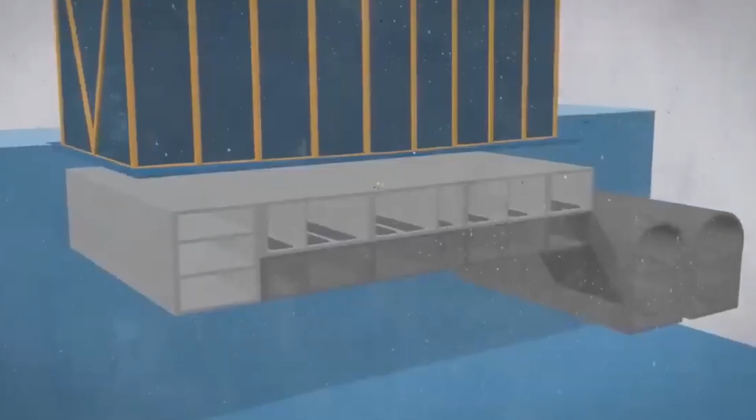The lifted base will create more outdoor space on the ground level on Park and Madison Avenues, which the studio plans to complement with a public plaza and green spaces. To secure approvals for the tower, the New York City Council dictated J.P. Morgan to spend $40 million for improving the district's condition and building a 10,000-square-foot public plaza in front of the tower. This will give Park and Madison Avenues 2.5 times as much ground-level outdoor space. It'll include enlarged walkways equipped with natural vegetation and services for neighborhood residents, workers, and regular guests.

Talking about the overall design, the tower consists of several vertical columns of differing lengths pressed together to form a step structure. The interior will feature 2.5 million square feet of working space along with a food hall, a penthouse conference center, and a fitness center. All this will come at a hefty price tag of $3 billion.

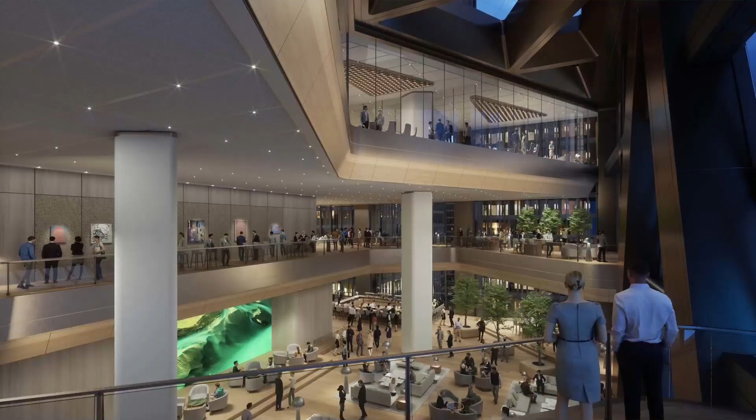The outstanding thing about this building is that it's going to run entirely on hydroelectricity. This makes it the biggest all-electric tower in New York, combined with the fact that it'll have zero net emissions. Foster + Partners claimed that 97% of the building materials were recycled during construction. Over 3 years, more than 93,600 tons of U.S.-made and fabricated steel, 93% of which is recycled.

The old building was demolished between 2019 and 2022, making it the tallest building to be voluntarily demolished. The previous record was held by the Singer Building, one of the earliest skyscrapers in Manhattan that was later demolished in 1968. To build such a large building, J.P. Morgan had to purchase hundreds of thousands of square feet of air rights from the nearby St. Bart's Church and MSD Capital.

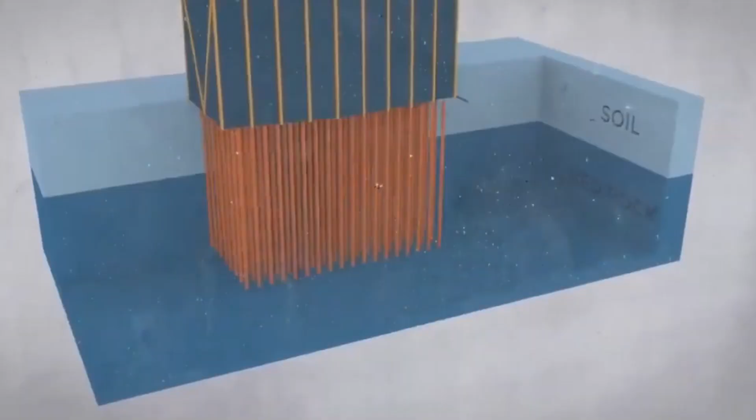Initially, 270 Park Avenue was supposed to be even taller, with a planned height of 1,400 feet. However, such a length requires deeper foundations that could interfere with the Grand Central Terminal directly beneath the tower and the East Side access tunnels. By late September 2023, construction had reached the 4th of 5 tiers. The steel skeleton of the tower is complete, and the last beam was placed in November 2023. The whole project is slated for completion in 2025.

Until the tower is finished, J.P. Morgan and its employees are using 383 Madison Avenue as temporary office space. During the building period alone, the project will create more than 8,000 construction jobs across 40 local unions. The tower's construction injected $2.6 billion into New York City's economy.

However, the design of the new headquarters is not without its share of criticism, particularly about its base columns. Architectural critic Alexandra Lange described the building as a son of Hearst Tower grafted on top of creepy legs, while others drew comparisons between the base columns and that of a ballerina's toes. But that's just their opinion, isn't it? We'd love to hear yours in the comments section.

Number 2: Commodore Tower at 175 Park Avenue. This tower's design is limited to paper only, but if realized, it can be the 3rd tallest building in New York City after the World Trade Center and Affirmation Tower. Towering up to 1,575 feet, 175 Park Avenue will be a super tall neighbor of the Grand Central Terminal.

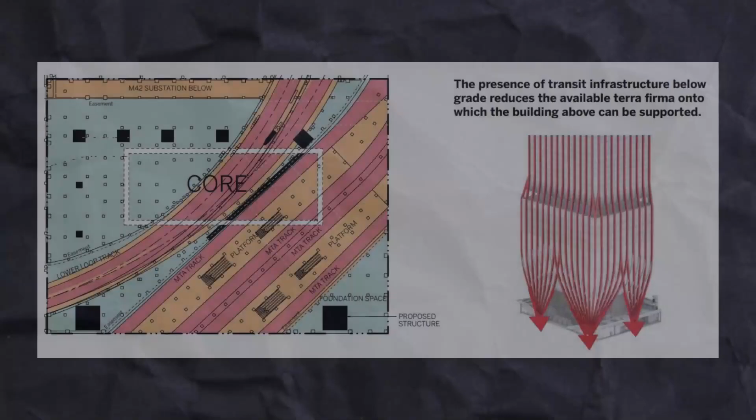It's intended to replace the Grand Hyatt Hotel owned by former President Donald Trump. The 26-story Grand Hyatt is 290 feet tall, but its successor will be grander, offering 2.2 million square feet of space for office, a new 500-room hotel, retail, and 25,000 square feet of publicly accessible terraces. As far as the design's concerned, it'll have a tapered shape set back in 4 tiers. This tapered design is a nod to the old skyscrapers in New York, and it'll allow more light to reach the street.

Glass and steel columns will run parallel on the outer skin of the tower, encasing its stone-clad core. At the base and the very top, these same columns will crisscross each other to form a beautiful lattice pattern.

The elevated public plaza along the eastern side of the property can be accessed by an outdoor staircase along East 42nd Street. The main lobby will feature a soaring atrium guarded by the triangular glass facade, allowing unobstructed views of Lexington Avenue and East 42nd Street. Notice how the huge steel framework over the lobby resembles a giant metallic hand trying to swallow the building.

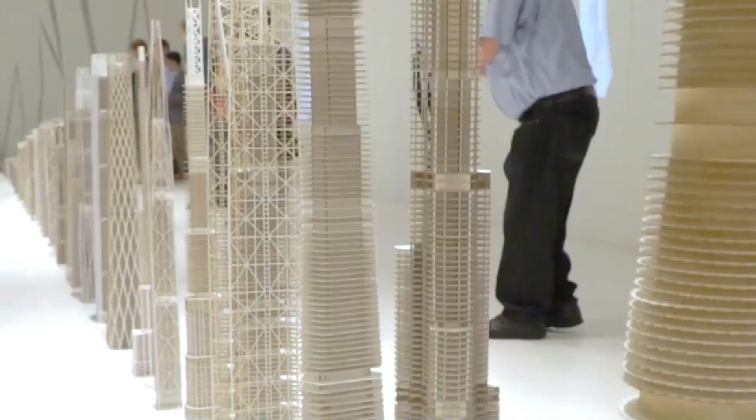Proposed by Skidmore, Owings & Merrill, or SOM, the new tower is set to solve the congestion on the pavement and build a clear path between 175 Park Avenue and the nearby Grand Central Terminal. In return for building this behemoth, the developers will spend hundreds of millions of dollars on new transportation infrastructure, including improvements to Grand Central Terminal, a new subway entrance on 42nd Street, and other public realm improvements.

An additional $5 million would be set aside for local nonprofit organizations and promoting art in the area. 175 Park Avenue will be located adjacent to the iconic Chrysler Building, which will no doubt be overwhelmed by the scale of the new skyscraper.

The Chrysler Building is just over 1,000 feet tall and gracefully reminiscent of New York's past. While the silhouette of both buildings is similar, the Chrysler Building's slim and needle-like proportions give it an air of elegance unknown to the new generation of skyscrapers.

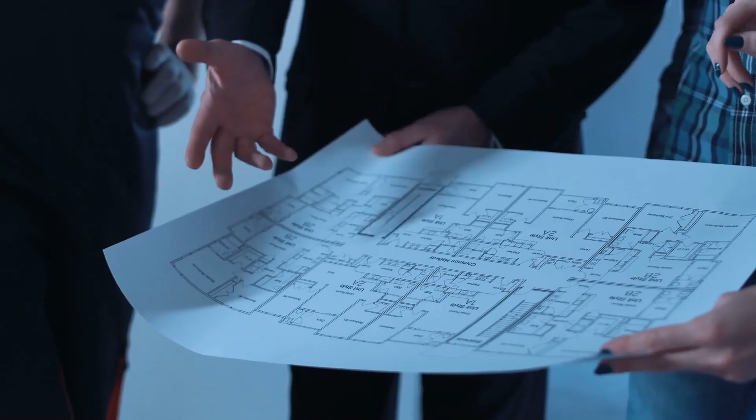To be fair to the new skyscrapers, they're made bulky as the prospective tenants demand larger floor plans to accommodate office, retail, and wellness facilities. Not to mention that New York remains the blue-eyed boy for many startups, businesses, and talented professionals. So the demand for spacious and cutting-edge high-rise developments isn't going away anytime soon.

Moreover, the 2017 Midtown East Zoning Initiative also encouraged bulky structures like the One Vanderbilt, 270 Park Avenue, which we just discussed, and the future 350 Park Avenue to come into existence.

For the tower to truly absorb its surroundings, it'll incorporate elements from its surroundings. For example, the skyscraper's use of stone and visual symmetry echoes the vibe of the Grand Central Terminal Station.

One of the challenges of this mega project is that it sits directly over some of the subway lines of the Grand Central Station. That's why the demolition process has to be carried out carefully, in addition to improving the layout of the underground train station.

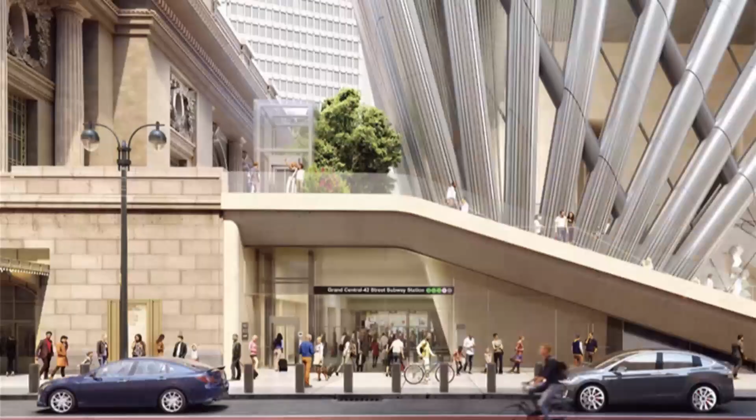Three new public terraces offering seating, food, and drink options will be built around the skyscraper, accessed via staircases and escalators. One of them, called the Chrysler Terrace, will allow visitors to have Instagram-worthy pictures of the vintage Chrysler Building.

The developers RXR Realty and TF Cornerstone acquired the site in 2019. In late 2021, the project gained approval from the New York City Council. However, the initial height of 1,646 feet has been slashed to the current 1,575 feet. Nevertheless, it's still enough to surpass Central Park Tower in New York. It's expected the construction will commence in 2026 and will be completed by either 2029 or 2030.

Number 3, Tower 5th. This is another proposed tower at Midtown Manhattan. The developer, Harry Macklowe, first revealed plans for this 1,556-foot tall tower in 2019. This means that it'll only be a few feet shorter than 175 Park Avenue, crowning it as the 4th tallest building in New York.

Its proposed location is directly north of St. Patrick's Cathedral, wedged between Madison Avenue and 5th Avenue. Gensler is the design architect for the building. Harry Macklowe finalized the $44 million purchase of this particular site in 2019.

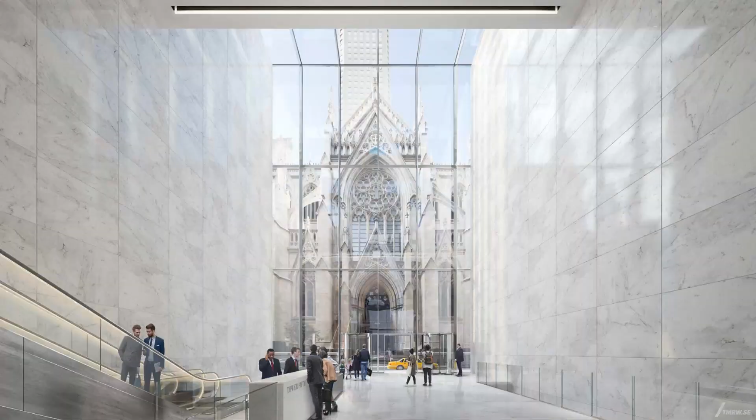The tower will enclose 960,000 square feet of office space, as well as shops, a food hall, and an auditorium. At the top of the tower, the city's highest observatory will offer unprecedented views, as well as unique experiential, cultural, and entertainment experiences. On the ground floor, there will be an 85-foot lobby that will secure the life-size view of St. Patrick's Cathedral.

There's nothing out of the ordinary about the outside appearance of the tower, except the narrow pedestal on which it stands. The pedestal rises nearly 400 feet above the street, higher than the spires in the nearby cathedral. The very top of the skyscraper reminds us of the wooden Jenga tower.

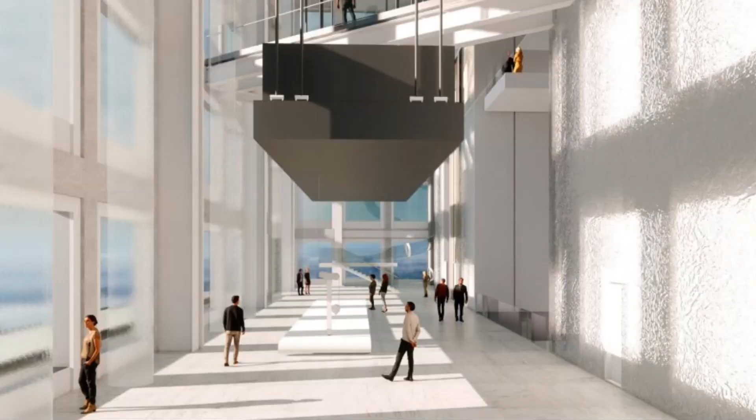Each floor offers 19,800 gross square feet of space without any columns, and a line of windows much like the fenestration of 432 Park Avenue. A restaurant sandwiched between the upper blocks will be encased by floor-to-ceiling glass. Imagine eating your lunch at such a height with a whole skyline of New York in front of you. A nerve-wracking experience for sure.

Other features include a retail and food market in the cellar levels, an atrium that spans the whole height, expansive seating areas, and a 3-story auditorium. The tower itself will be wrapped in an energy-efficient closed-cavity facade system to reduce solar heat gain by over 70%. It'll be the first deployment of this type of system in North America.

The next part isn't for the faint-hearted. There will be a protruding glass plate, almost like the skywalk at Grand Canyon. Two small buildings, one of them being the Venezuelan consulate, will be demolished to free up space for the tower.

But let's keep in mind, securing approval for this mega project would be a lengthy struggle. Its proximity to 5 landmark buildings, including Rockefeller Center and St. Patrick's Cathedral, will bring Macklowe's project into clash with the Landmarks Preservation Commission.

Additionally, if the project's to go forward, Macklowe would have to transfer air rights from St. Patrick's. Since Tower 5th is planned to be 66% larger than current zoning allows, Macklowe will require special permits, zoning approvals, and zoning changes to execute the project. If the project gets the green light, it'll no doubt redefine the skyline of the city.

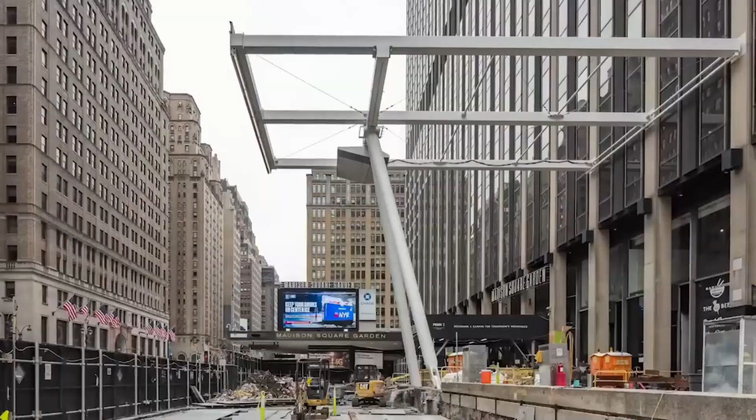Number 4, 15 Penn Plaza. This is a planned office tower to be constructed by Vornado Realty Trust on 7th Avenue between 32nd and 33rd Streets in Midtown Manhattan. It'll be a 67-story skyscraper, reaching up to an incredible height of 1,270 feet.

Designed by Foster + Partners, it'll yield 2.7 million square feet of office space and stand as the centerpiece of the 7.4 million square foot Penn District Master Plan. This redevelopment aims to transform and revitalize the area between 6th and 7th Avenues and West 32nd and West 34th Streets with a total of 8 new buildings.

In a nutshell, the overall appearance of the tower makes it look like a chest of drawers. But if you start to look closer, that's truly where you can admire its grandeur. The latest renderings show 9 cantilevering volumes topped with landscape terraces on the western elevation.

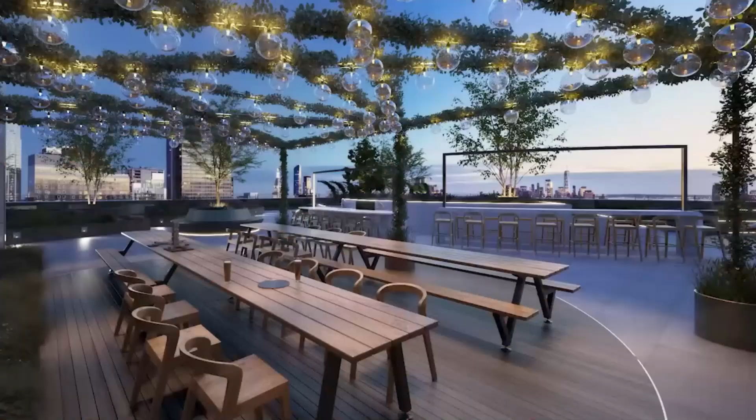The northern face is lined with steel beams and metal paneling, with 3 vertical window columns. The rendering also showcases the tower's relative height to that of the Empire State Building. 15 Penn's top tenants have the advantage of a 360-degree view of Lower Manhattan's skyline and New York Harbor.

The lobby's futuristic design fits a skyscraper of the 21st century. The lobby's high ceiling is enclosed by an equally tall glass frame overlooking the street. It looks even more majestic at night as the light from the inside shines on the outside pavement. The main lobby is as spacious as a shopping mall with 4 escalators to facilitate people's movement.

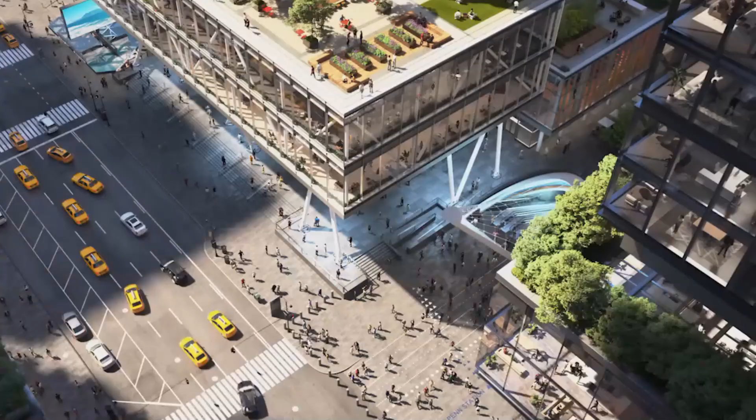The updated design shows a different version of the tower's crown. The old design consists of an extension covered with horizontal metal grills. The new version replaces metal with glass, so you'll see rectangular glass boxes stacked on top of each other. The extensive use of glass gives a very sophisticated energy to Penn 15 and makes it appear lighter and hence less bulky.

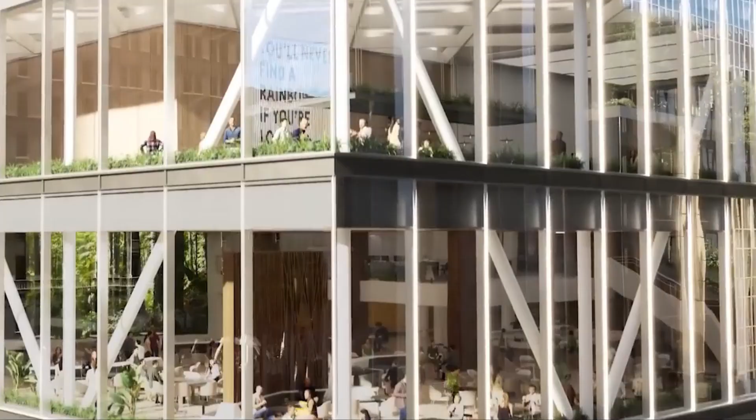Penn 15 will be divided into 5 tiers that encompass several office floors that would be serviced by its own set of express elevators. The highest office level will be 1,165 feet high on the 61st level. A total of 27 landscape terraces will be found at varying heights on the building's spine. It almost looks like a vertical farm from afar. In that way, it stands out from the rest of the monolithic structures dominating the region.

While the project seems great, there is only one bad outcome. To build this 1,270-foot tower, Hotel Pennsylvania had to be razed to the ground. The demolition of this century-old hotel is almost complete.

During its heyday, Hotel Pennsylvania was once one of the largest hotels in the world, with 2,200 furnished rooms. The hotel hosted top-notch celebrities and politicians of its time, like Fidel Castro and Duke Ellington.

Vornado Realty Trust bought the hotel back in 1990, and in 2008 it was given the status of a landmark. After fierce and unsuccessful preservation battles, the 22-story hotel was finally demolished in July 2023.

Construction of the tower is postponed as of now, and Vornado is considering using the site for fashion shows or other temporary use. The tower's construction has also been postponed in the past due to low office market rents. Undoubtedly, this has made some people angry who were against the demolition of the historic hotel. To be fair, it appears to them it was destroyed to build a commercial tower whose plan still hangs in the air. If construction goes ahead, Penn 15 would cost a whopping $1.3 billion, or even possibly more depending on how much it gets delayed.

Number 5: Affirmation Tower. This tower comprises 5 rectangular boxes that grow in size as they climb upward to its 1,663-foot mark. Given its upside-down step design, it gives the illusion that it might tip over on a windy day. Designed by award-winning architect Sir David Adjaye, his designs tend to incorporate bizarre shapes into a neat and sleek design. If approved, Affirmation Tower would be built on Site K, 1 block from the High Line, Hudson Yards, and New York City's No. 7 subway line.

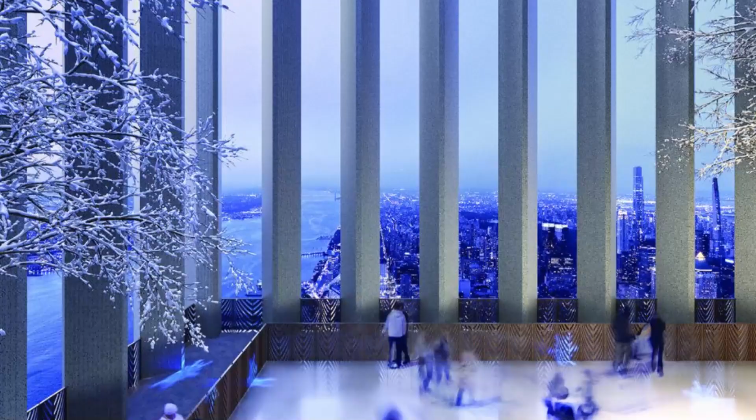Let's examine the exterior more closely. The tower goes 90 stories up with white vertical fins spanning each of the 5 boxes. Behind these fins, there's a floor-to-ceiling glass wall separating the building from the outside environment. Upon closer inspection, you'll see that the top 3 units are equipped with landscape terraces. The rooftops are also enhanced by adding lush vegetation and closed by the extension of the white fins.

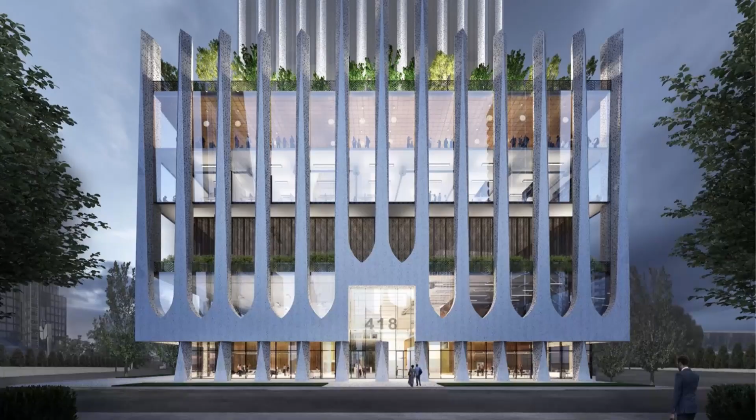The ice skating rink would be available in the winter months. Here, residents and non-residents can skate along with bonus views of the Hudson Yards. The main entrance also shows the same parallel line pattern consistent with the rest of the tower's body. It'll be positioned along 11th Avenue, while a separate entrance for the observatory will be located on the other side of the ground floor. The Affirmation Tower would be a $3.5 billion addition to the Hudson Yards skyline.

Number 6: 525 Fifth Avenue. We had purposefully left the most glamorous skyscraper for last. 525 Fifth Avenue is also a mixed-use building under construction in Midtown Manhattan. It may not be the tallest out of all the structures that we discussed, yet it still has a decent height of 1,000 feet. The 76-story structure will span 415,000 square feet and yield 98 condominium units and commercial space spread across the ground floor and 4 cellar levels.

Its design is unique from the grid window pattern seen in most tall buildings. The tower will feature arched windows repeating along the entire length of the tower. The front view sketches show landscape terraces at varying heights along the facade. The ground floor entrance plays with the same details of arch columns, and the building's address is shown embedded into the sidewalk in interlocking numerals at the foot of the main doors. The arch details of the exterior wall were inspired by the New York Public Library and Grand Central Terminal.

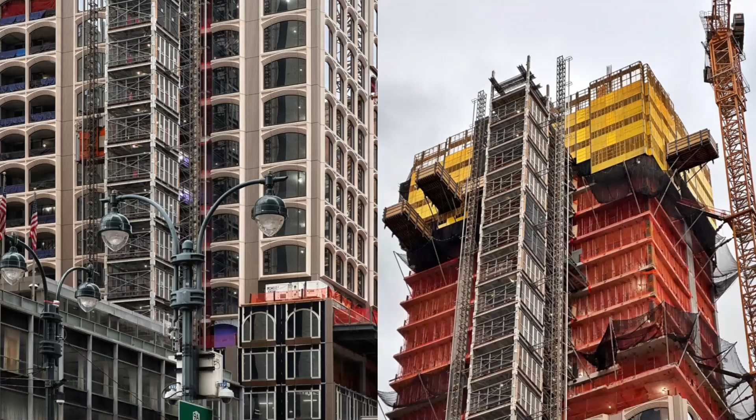The development firm behind this project, Rabina, closed on a $540 million construction package to complete 525 Fifth Avenue. Recent photographs show the skyscraper nearing the 1/3 mark, followed closely behind by the installation of its facade. 525 Fifth Avenue's completion date is posted on the construction board for June 1, 2026.

Last month, Architects Journal revealed that Foster + Partners is planning a massive project in Saudi Arabia, a skyscraper stretching 2 kilometers into the sky. If they pull it off, this giant would not only tower over the 828-meter Burj Khalifa, but also double the height of Saudi Arabia's previous record attempt, the Jeddah Tower. This monumental building is set to rise in the city of Riyadh.

This announcement raises a big question. Is it really possible to build a skyscraper so tall? And if so, how would engineers and architects go about it?

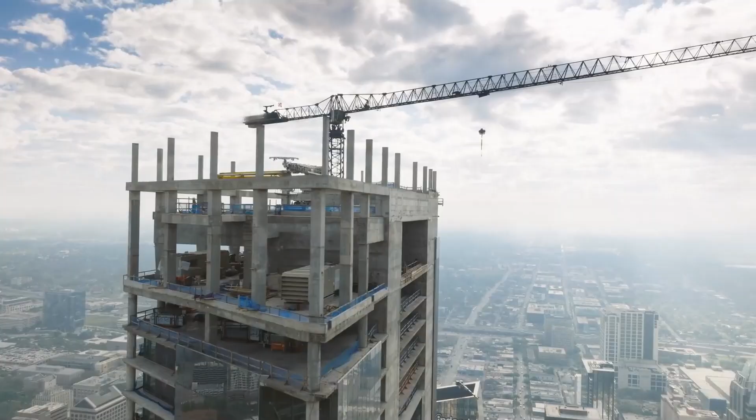Let's take a creative approach to understanding the sheer magnitude of a 2-kilometer tall skyscraper. Picture Manhattan with its dense layout and towering buildings. Right in the center of it lies Central Park, a lush green oasis stretching about 4 kilometers long. Now imagine slicing this iconic park in half, then standing that half upright. What you'd have would then resemble the staggering height of a 2-kilometer skyscraper, so tall it would loom high above every other structure in New York's famous skyline.

But there's more to think about than just height. Let's talk about the footprint of such a gigantic building. Consider 432 Park Avenue, a standout in the city for its sleek, slender design. This skyscraper has a width-to-height ratio of 1:15, making it one of the thinnest in the world.

Even so, applying this ratio to a building that stretches 2 kilometers into the sky means the base would have to be enormous. In fact, it'd be so large that it wouldn't even fit on a typical New York City block, which measures about 80 by 274 meters. That puts it into perspective just how massive and frankly unrealistic such a skyscraper would be.

It's fascinating to think about these architectural what-ifs, isn't it?

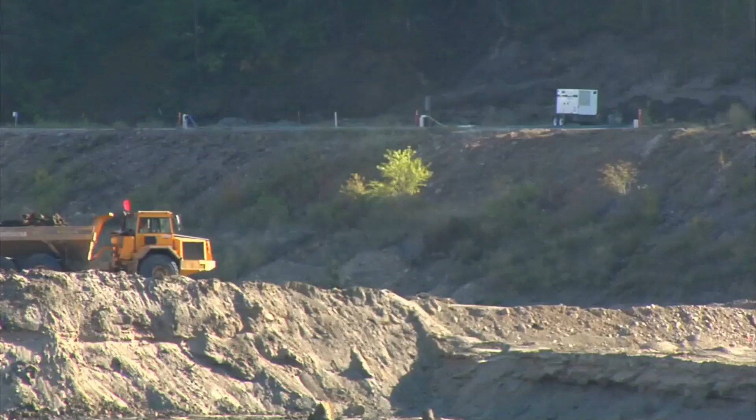When contemplating the design of an extraordinary skyscraper, especially one that towers to a dizzying 2 kilometers, it's crucial to start with its core. This isn't just the physical backbone that holds everything together, from structural steel to electrical systems, it's also home to a vital yet often underestimated component: lift shafts. The core of a skyscraper is essentially its command center, housing critical systems like plumbing and electrical conduits alongside the all-important lift shafts.

With a building reaching 2 kilometers, translating to approximately 500 stories, the challenge of moving people efficiently becomes a central concern. Imagine this building at full capacity, bustling with around 100,000 people, equivalent to a small city. The sheer volume of individuals needing to move in and out between these floors is staggering.

In a typical skyscraper, lift systems are designed to maximize space while providing efficient transport. However, as the number of lifts increase, the usable space within the building diminishes. This is a significant design challenge, as every square meter taken up by lift shafts is space not available for offices, residences, or amenities, the very purposes for which the skyscraper is built.

One common solution to manage the vertical commute in such tall buildings is the introduction of sky lobbies. These intermediary stopping points serve as transfer hubs where people switch from express lifts that shoot straight up from the ground level to local lifts that ferry them to specific floors. This system not only speeds up travel time, but also optimizes the use of lift shafts, allowing for a more spacious and functional design within the living and working areas.

However, in the case of a 2-kilometer skyscraper, traditional sky lobbies might not suffice due to the extreme number of floors. Therefore, more innovative solutions are necessary to enhance efficiency and capacity. Enter the concept of double-decker lifts. This ingenious design stacks 2 lift cars one above the other in the same shaft. The arrangement is straightforward yet effective: passengers heading to odd-numbered floors board the lower car, while those going to even-numbered floors use the upper one.

This setup essentially doubles the capacity of each lift shaft, allowing more people to move quickly throughout the building. Double-decker lifts not only maximize the efficiency of vertical transportation, but also dramatically reduce the wait time and congestion during peak hours. Such a system can be a game-changer in the functionality of a skyscraper as colossal as the one we're envisioning.

Plus, these lifts can be enhanced with smart technology. Imagine a system where passengers enter their destination floor on a touchscreen panel before boarding. The lift algorithm then calculates the most efficient route, possibly even grouping passengers by destination to reduce the number of stops. This could further streamline the flow of people and improve the overall efficiency of the building's transportation system.

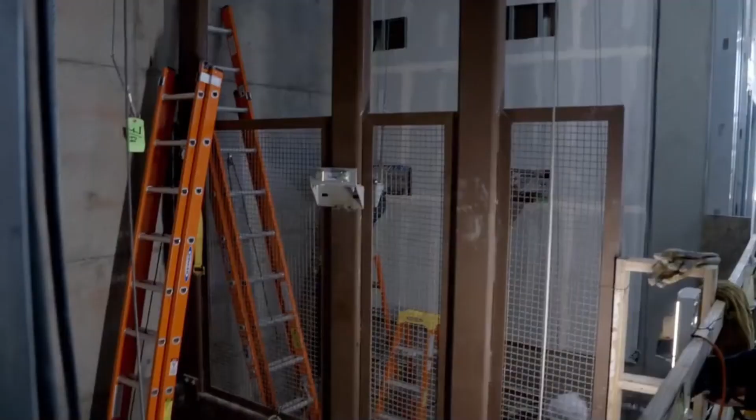However, implementing such advanced lift systems in a super tall skyscraper is not without challenges. The cost of installing and maintaining such high-tech lifts is significant, and the structural implications of housing multiple double-decker lift shafts needs to be meticulously planned. The engineering behind ensuring these lifts can safely and swiftly move hundreds of people at a time up and down a building that stretches 2 kilometers in the sky is not a small feat.

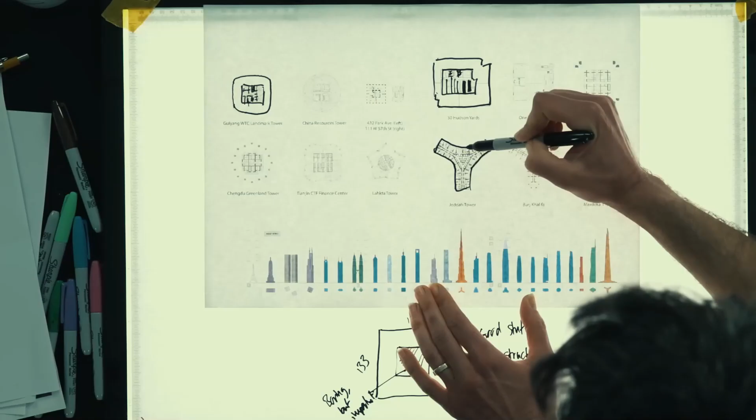Okay, so that's one way of getting people up and down the core, but what could a 2-kilometer core actually look like? They must ensure the structure is not only functional, but also resilient against natural elements like wind and seismic activities. One innovative design that has proven effective for super tall buildings is the propeller-shaped or 3-pronged star floor plan. This architectural approach isn't just a stylistic choice, it's a strategic one, rooted deeply in the principles of engineering and physics.

This design was first popularized by the CN Tower in Toronto, which opened back in 1976. The tower's core, shaped like a propeller, offers exceptional stability and wind resistance, making it a pioneering structure in its time. The primary advantage of this design is how it distributes the building's mass, helping it to withstand high winds and other lateral loads. This is critical in very tall structures where wind forces can significantly impact the building's integrity and the comfort of their occupants.

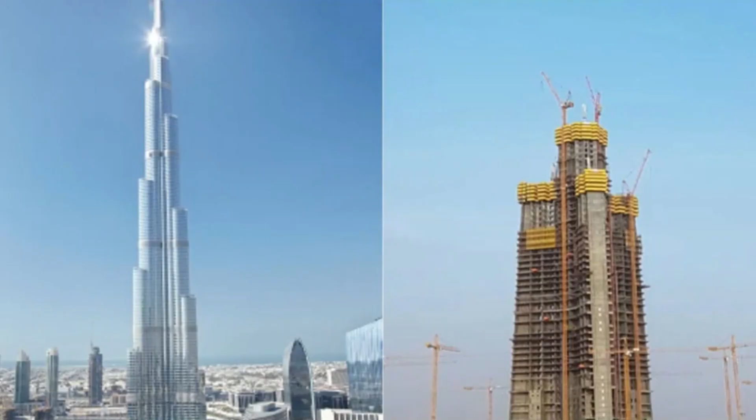The Burj Khalifa in Dubai and the Jeddah Tower in Saudi Arabia, 2 of the tallest buildings in the world, have adopted this propeller-shaped design. Both exceed 800 meters, with the Jeddah Tower projected to nearly reach a kilometer upon completion. Their cores spread out in a Y-shaped configuration, which not only aids in stabilizing the structure, but also helps in breaking up wind vortices, essentially reducing the sway that occupants might feel on higher floors.

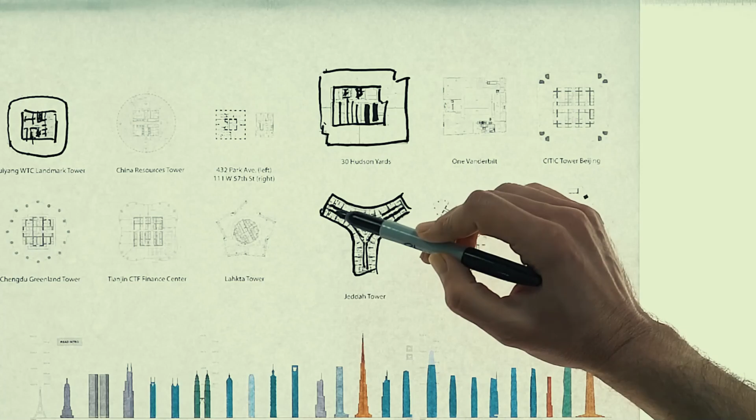However, this design comes with its trade-offs, primarily concerning the internal space of the building. The extensive buttressing required to support such a core limits the amount of usable, occupiable space within the skyscraper. This wasn't much of an issue for the CN Tower, whose main occupied areas are concentrated at the top, primarily for observation and communication purposes. But for multi-purpose skyscrapers like the Burj Khalifa, which includes hotels, residential spaces, and offices, this limitation is a significant consideration.

Despite these constraints, the propeller-shaped core remains a preferred choice for ultra-high skyscrapers. With current technology and materials, it offers the best balance between height and stability. Engineers continue to refine this design, optimizing the use of materials and space to push the boundaries of how tall buildings can go. For a skyscraper reaching 2 kilometers, such innovations in core design will not only be necessary, but will define the very feasibility of the structure.

As skyscrapers push the boundaries of height, they become increasingly vulnerable to the forces of nature, particularly wind. This susceptibility is akin to the effect of applying force to the top of a small Lego tower. While pushing at the base might not move it, a push at the top can easily cause it to topple. This analogy helps illustrate the challenges engineers face when designing super tall buildings, where the higher they go, the more they must consider how wind will impact the structure.

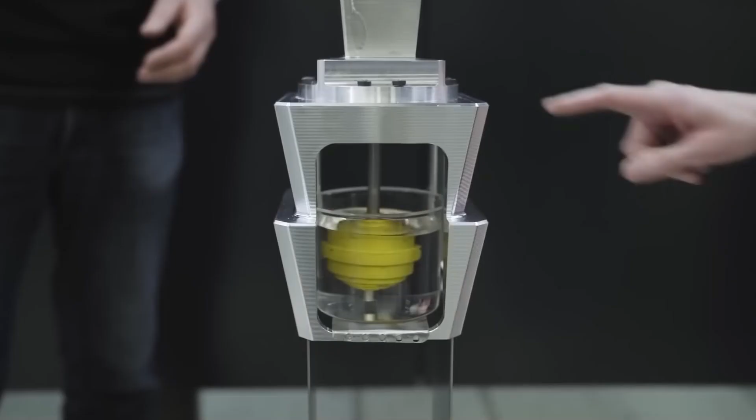Over the years, ingenious solutions have been developed to mitigate the effects of wind on these towering structures. For instance, Taipei 101, which was the world's tallest building from 2004 to 2010, employs a tuned mass damper, or TMD. This device consists of a massive 660-ton ball suspended between the 92nd and 87th floors. In windy conditions, the TMD swings, absorbing the energy transferred to the building by the wind, thereby stabilizing it and reducing sway that could lead to discomfort or structural issues. This ingenious solution acts like a giant pendulum, working against the movements of the building to keep it steady.

Another architectural marvel, the Shanghai Tower, which stretches up to 632 meters, utilizes a twisted exterior design. Not only does this provide a visually striking aesthetic, but it also plays a critical role in wind mitigation. The twist in its structure helps deflect wind along the entire length of the tower, distributing the forces more evenly and reducing the wind's impact as it climbs higher.

These strategies highlight the creativity and engineering prowess that goes into designing skyscrapers capable of withstanding nature's challenges. However, as we consider pushing the envelope further with a proposed 2-kilometer tall skyscraper, we must ask ourselves several questions.

Will current technologies be sufficient to counteract the amplified effects of wind at such extreme heights? Can these methods be scaled effectively, or will entirely new innovations be necessary? One might wonder if it's even feasible to employ a tuned mass damper of the size that would be required for such a height. How large would it need to be, and what would be the implications for the building's overall design and functionality? Similarly, could the twisting design employed by the Shanghai Tower be adapted to a much taller structure without compromising on space and other architectural elements?

Moreover, while these solutions have proven effective for buildings up to 600 meters, a 2-kilometer skyscraper would introduce a whole new set of challenges. The forces acting on such a structure would be unprecedented, and the engineering solutions would need to be proportionally more robust.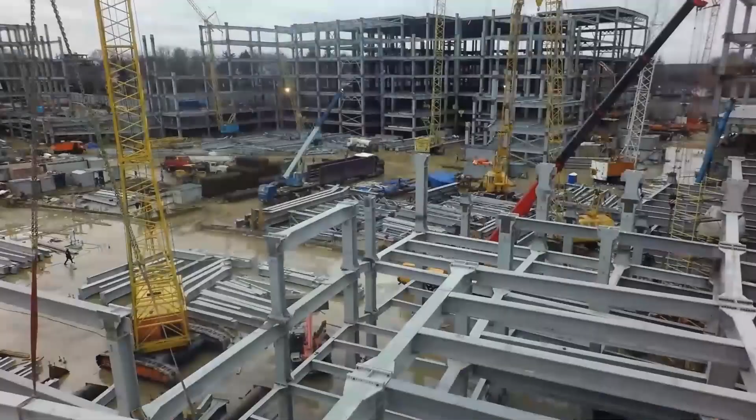In exploring these possibilities, it's essential to engage in a dialogue about the limits of current architectural and engineering practices. What new materials or technologies might need to be developed to ensure the feasibility of such a project? How would the increased use of resources such as steel and concrete impact the project's environmental footprint? And importantly, how can the safety of these monumental structures be guaranteed in the face of unpredictable weather patterns and natural disasters?

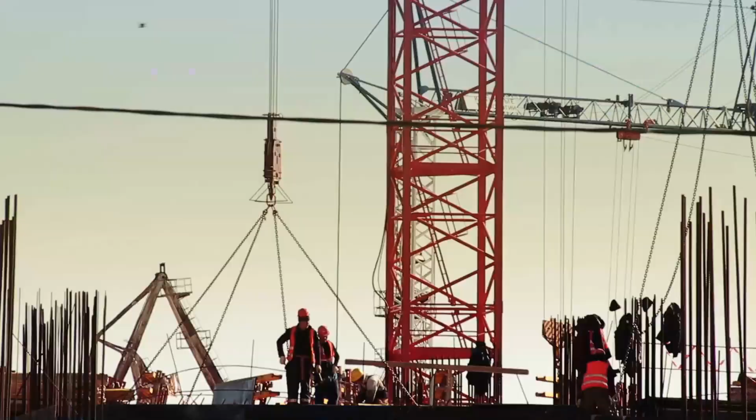History shows us that architectural ambitions often stretch the limits of contemporary technology and drive innovation. From the Eiffel Tower to the Burj Khalifa, each leap in skyscraper height has brought new challenges and spurred advancements in building technology. As we discuss the prospect of a 2-kilometer skyscraper, we continue this tradition of pushing the boundaries of what's architecturally possible. Engaging with these challenges not only prepares us for the specific project at hand, but also enriches our overall understanding of structural engineering and architecture.

It forces us to think critically about the balance between aspiring to build higher and the practical implications of such ambitions. As we've seen with other ambitious projects, from mountains hollowed out for scientific endeavors to giant cinematic spheres, the boundary between the fantastical and the feasible is constantly evolving. While the idea of a 2-kilometer skyscraper might seem daunting, the journey towards such a feat could unlock new doors in architectural design and engineering.

The key question remains, are we ready to take the leap? And if so, how will we ensure the journey is both successful and sustainable?

You probably know that the Burj Khalifa in Dubai holds the title for the world's tallest skyscraper. This massive tower reaches 828.8 meters, setting a record that nobody seems likely to beat soon. But have you heard about the second tallest building? A while back, the Shanghai Tower, standing at 632 meters, held that second place spot. But in 2023, it got bumped down to third place.

The new second tallest skyscraper is the Merdeka 118, located in Kuala Lumpur, the capital of Malaysia. At 678.9 meters, it's much shorter than the Burj Khalifa, but it's enough to take Shanghai Tower's spot. If you're into skyscrapers, keep an eye on this new giant as they wrap up construction. Here's everything you need to know.

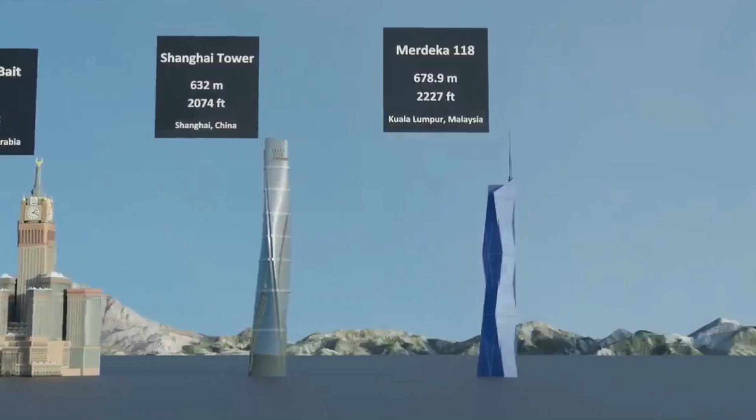Merdeka 118, also known as Menara Warisan Merdeka, KL 118, and PNB 118, is a towering 118-story skyscraper in Kuala Lumpur, Malaysia. With a height of 678.9 meters, it's the second tallest building in the world, second only to the Burj Khalifa in Dubai, which tops out at 828 meters. The name Merdeka means independence in Malay, which ties into the building's location near the Stadium Merdeka, a historic site where Malaysia declared its independence.

In December 2022, the construction of Merdeka 118's spire reached its final height, placing it 678.9 meters above ground and 700.9 meters above sea level. Merdeka 118 is the tallest building in Malaysia and all of Southeast Asia, overtaking the Exchange 106 at 453.6 meters and Landmark 81 in Vietnam at 461.2 meters. Besides its impressive height, the building has earned a triple platinum rating for sustainability, receiving accolades from global certifications like Leadership in Energy and Environmental Design.

The Merdeka 118 development, which covers 19 acres, is funded by Permodalan Nasional Berhad with a budget of RM5 billion. When completed in 2023, it became the tallest building in Malaysia. The tower, constructed in 3 phases, includes 400,000 square meters of residential, hotel, and commercial space.

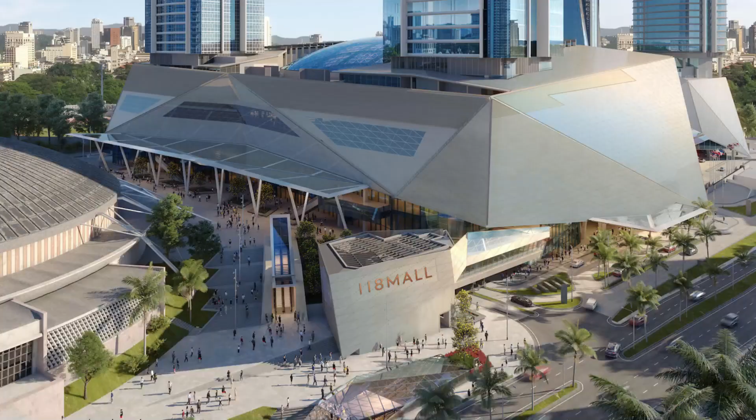Merdeka 118 is a mixed-use building with office space, hotels, and retail outlets, and an observatory floor that'll be the highest observation deck in Southeast Asia. It features 2 observation decks, one inside the building and another in the spire. There's also a retail business center, the 118 Mall, and it's surrounded by 4 acres of urban and linear parks.

The non-rentable space includes elevators, recreational and maintenance facilities, and parking spaces for up to 8,500 cars. 60 out of the 80 stories of office space will be reserved for Permodalan Nasional Berhad, the project developer, and its subsidiaries. The building's design caters to both business and leisure, with a variety of spaces designed for multiple purposes.

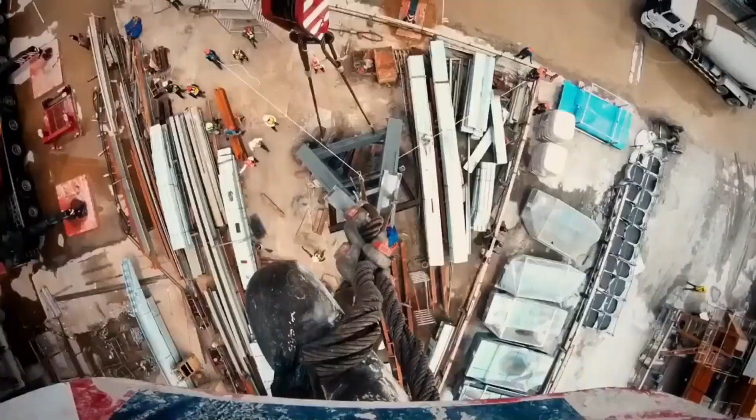The observatory deck offers breathtaking views, while the retail outlets and urban parks add to the area's appeal as a destination for both visitors and locals.

Merdeka 118 is located on Jalan Hang Jebat, where Merdeka Park once stood, which was later turned into an open-air parking lot. The spot's near several landmarks, including Petaling Street and sports venues like Merdeka Stadium, Stadium Negara, and Chinwoo Stadium. It's also close to 3 schools: the Victoria Institution, the Methodist Boys' School, and the Chinese-type Jalan Davidson Primary School. Across the Ampang line, you'll find the stalled Plaza Rakyat project.

Once the Merdeka 118 development is completed, it'll have easy access to the new Merdeka MRT station on the Kajang Line SBK. It'll also have direct connections to 3 major roads through the Belfield Tunnel, a 2-story underground tunnel running beneath Kampung Atap and Jalan Maharajalela to the precinct's basement. These connections make the area more accessible and better integrated into Kuala Lumpur's transportation network.

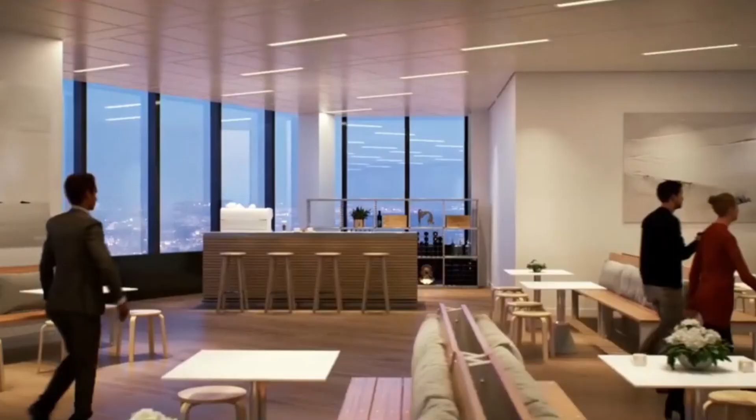With all these connections and landmarks nearby, the Merdeka 118 development is set to become a central hub in Kuala Lumpur, offering a mix of commercial, residential, and leisure spaces. The easy access to public transportation and major roads should make this location convenient for commuters and visitors alike.

Merdeka 118, a massive 118-story skyscraper, represents a milestone in Kuala Lumpur's skyline. The tower, which stands at 678.9 meters, holds the distinction of being the second tallest building in the world and the tallest in Southeast Asia.

It was designed with diamond-shaped glass facades, a nod to Malaysia's diverse culture. The building's design was inspired by Tunku Abdul Rahman's iconic gesture when he proclaimed Malaysia's independence in 1957.

The visionary behind this project, Tengku Ab Aziz, took on the challenge of bringing this massive development to life. His approach and attention to detail were crucial to the successful completion of Merdeka 118. Having led the project for nearly 15 years, he oversaw every aspect, from planning and design to procurement and construction. This dedication and leadership earned him the Malaysia Property Award MPA 2023 Property CEO of the Year.

Merdeka 118's location is significant. It's located on Jalan Hang Jebat, on the former site of Merdeka Park. This spot is surrounded by historical landmarks and has a direct link to transportation hubs like the newly built Merdeka MRT station on the Kajang Line. The building also connects to major roads through the Belfield Tunnel, enhancing accessibility for visitors and commuters.

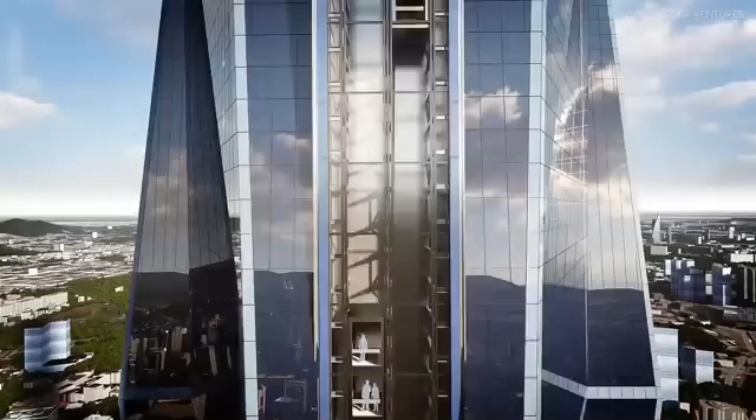The structure's impact extends beyond its impressive height. It's set to feature a mix of commercial, residential, and leisure spaces, including 400,000 square meters of residential areas, office space, hotels, and retail outlets. There's even an observation deck, the highest in Southeast Asia, offering breathtaking views of Kuala Lumpur.

Throughout the construction process, Tengku Ab Aziz and his team faced various challenges. Building such a massive tower in a historic part of the city required a careful approach, especially with nearby heritage sites like Stadium Merdeka and Stadium Negara.

The tower's foundation was a complex engineering feat, with deep bore piles to support the immense weight of the structure. To ensure safety and stability, they introduced a 78-meter diameter cofferdam for deep excavation and pile installation. Despite these challenges, the team successfully completed the superstructure, implementing innovative designs and sustainable practices.

Merdeka 118's cladding comprises 18,144 panels, 114,000 square meters of glass, and 1,600 tons of window frame extrusions. The building also features 8.4 kilometers of LED light strips for nighttime illumination.

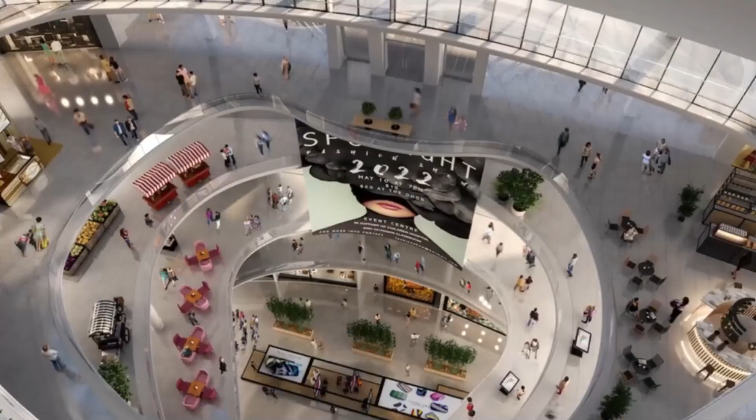The Merdeka 118 precinct is more than just a skyscraper. It includes 118 Mall, a retail business center, luxury hotels, and 2 premium residential towers. It also encompasses 4 acres of urban parks, contributing to Kuala Lumpur's green spaces.

The construction of Merdeka 118, Malaysia's tallest skyscraper, involves several key players. Pintaras Geotechnics was responsible for the piling and foundation work.

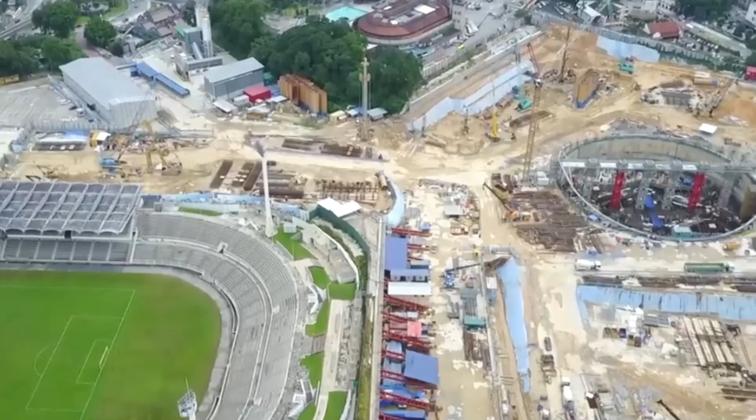Six groups were shortlisted for various construction jobs, including Samsung C&T, UEM Group, IJM Corporation, Northwest Holdings and Shimizu Corporation, Malaysian Resources Corporation and State Construction Engineering Corporation, WCT and Arabtec Construction LLC, TSR Capital and Daewoo Group, Shikaro Group, Sinohydro Group, and Shanghai Construction Group. These groups submitted their bids by January 28, 2015.

Kone, a Finnish company, provided about 87 elevators and escalators for the project. On November 23, 2015, Permodalan Nasional Berhad awarded a contract worth RM 3.4 billion to a joint venture between South Korea's Samsung C&T and UEM Group Berhad.

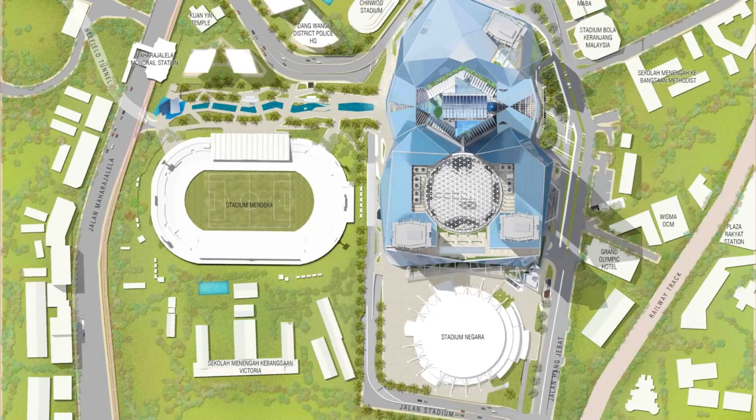Later, in November 2017, PNB announced plans to raise up to RM 5 billion via Green Sukuk, the Merdeka ASEAN Green Sukuk, with a 15-year tenure. This sukuk was designed to fund the development of Merdeka 118's 83-story office space. It also demonstrated PNB's commitment to sustainability, as the project adhered to the ASEAN Green Bond standards.

In 2018, Park Hyatt announced plans to open a hotel in Merdeka 118, occupying the top 17 floors with 232 units, including 28 suites and 30 apartments.

However, construction faced delays due to the COVID-19 pandemic. Work was halted on March 18, 2020, following Malaysia's movement control order, but resumed in mid-May 2020. Despite these setbacks, the building's concrete core topped out at 118 floors by early August 2020, surpassing the Vincom Landmark 81 as the tallest building in Southeast Asia.

By October 2020, PNB President Ahmad Zulqarnain Onn announced that Phases 1 and 2 were expected to be completed by the third quarter of 2022, with Phase 3 set for 2024 or 25. At that time, construction was in Phase 1, focusing on the tower.

As of June 2021, the tower had reached 81% completion, with the installation of the glass facade at level 108 and the spire 50% assembled. The project had reached level 118, and the retail podium was progressing.

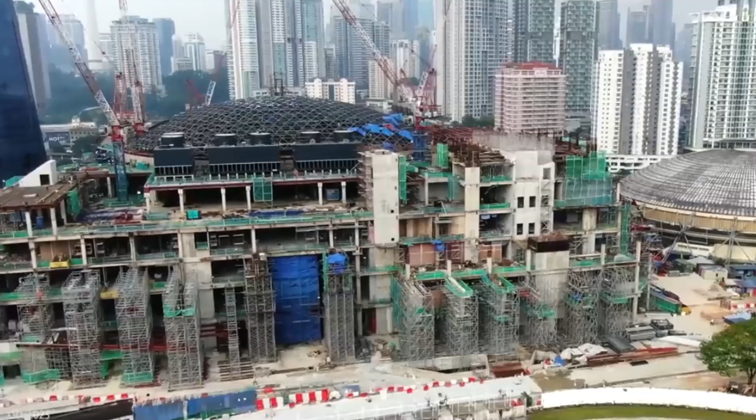Turner International acted as the project management consultant for this massive undertaking. Merdeka 118 officially topped out in November 2021, marking a significant milestone in its construction.

The building's official inauguration took place on January 10th, when the then Yang di-Pertuan Agong Al-Sultan Abdullah inaugurated the skyscraper, noting that this new landmark represents the unity and diversity of Malaysia as an independent nation.

Many Malaysians have voiced criticism of the Merdeka 118 project, arguing that it's an unnecessary use of public funds. With over RM 5 billion invested, some argued that the money could have been better spent on essential areas like education and healthcare, which are facing increasing challenges in the country.

In response to this criticism, former Prime Minister Najib Razak defended the project, claiming it would bring economic benefits and opportunities. The project also faced security concerns, highlighted by two trespassing incidents.

In 2022, a viral video showed a group of American individuals trespassing at the top of Merdeka 118, sparking outrage over the lack of security. The developer emphasized that such actions are illegal and that trespassers were eventually charged under Malaysian law.

Later that year, Russian roof-toppers Angela Nikolau and Ivan Beerkus scaled the spire of Merdeka 118, triggering further criticism. Malaysian police requested entry and exit records from the immigration department, but no records of the duo entering or exiting Malaysia were found, suggesting they entered the country illegally.

The Home Minister confirmed a full investigation is underway to address the incident and ensure security measures are strengthened. But despite that, this building is a great achievement and a massive milestone for Malaysia, both figuratively and literally.

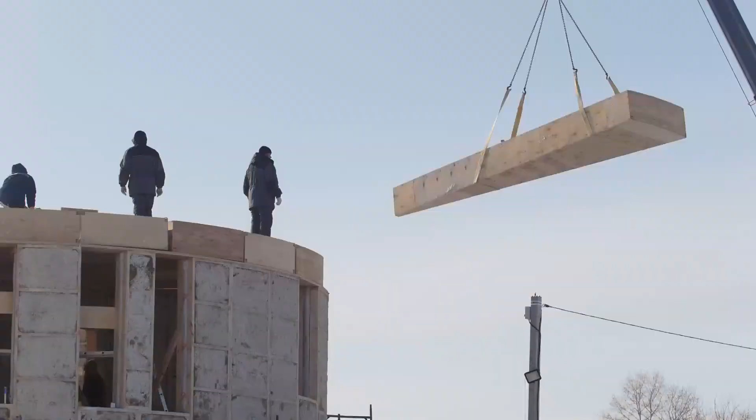Designing and constructing the world's tallest skyscraper amidst the seismic and meteorological challenges of Taipei was no small feat. Taipei 101 emerged as a triumph of human achievement, a marvel of modern architecture that defies nature's fiercest forces.

The journey of Taipei 101 began with a vision, a dream by developer Harace Lin since childhood. For Lin, this skyscraper represented more than just a building. It was a declaration of Taiwan's technological prowess and industrial ambition. It was a beacon illuminating Taiwan's path to global prominence, a testament to its capability not only to compete, but to lead on the world stage.

As one of Taiwan's most prominent businessmen, Lin's determination propelled Taipei 101 from concept to reality, shaping its destiny as a towering icon of progress.

Architect C.P. Wang, a longtime collaborator of Lin's, played a pivotal role in shaping Taipei 101's design. Originally conceived as a centerpiece for Taipei's burgeoning Xinyi district, the building's ambitions quickly outgrew its initial scope. What began as a modest 60-story structure evolved into an 88-story titan, driven by a relentless pursuit of excellence and a desire to make history.

With each floor added, Taipei 101 inched closer to its destiny as the world's tallest skyscraper, fueled by the collective determination of its creators. Standing at 1,667 feet, it comprises 101 floors above ground and 5 basement levels.

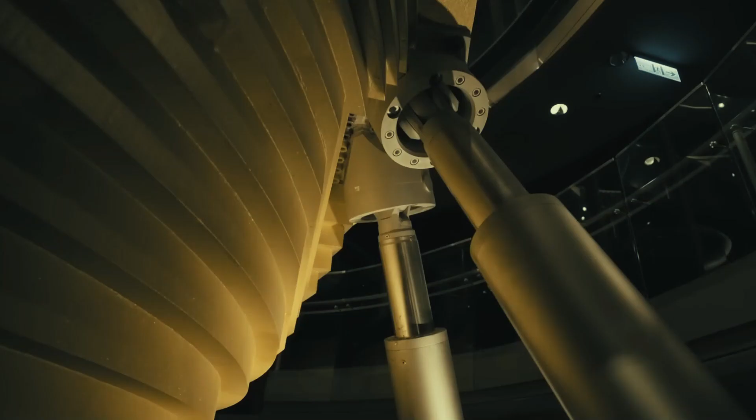The tower employs a tuned mass damper, a 660-ton pendulum that counters swaying caused by strong winds, reducing building movement by up to 40%. Taipei 101 is built to withstand earthquakes with a seismic design that can absorb ground motion, ensuring safety during seismic events.

It incorporates sustainable design elements, earning LEED Platinum certification with energy-saving features like double-pane windows and efficient HVAC systems. Its elevators are among the world's fastest, reaching speeds of 37.7 miles per hour, transporting visitors from ground to observation decks in just 37 seconds.

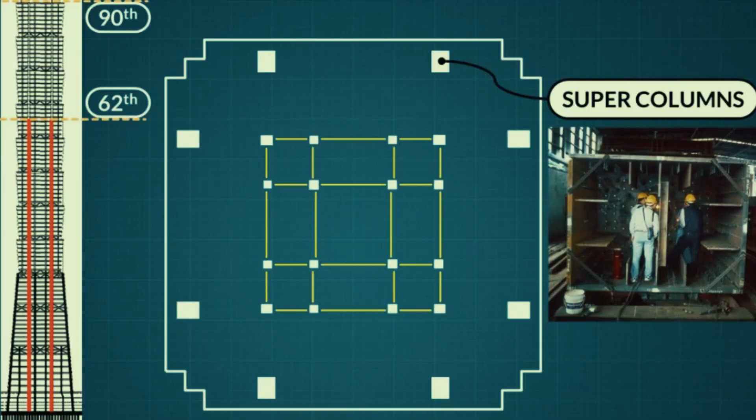At the heart of Taipei 101's foundation lies a sophisticated network of reinforced concrete piles, meticulously engineered to distribute the building's colossal weight evenly and anchor it firmly to the bedrock below. A massive concrete slab spanning 23,000 cubic meters rests atop this intricate foundation system, effectively fusing the building to the earth beneath.

This formidable foundation, coupled with Taipei 101's mega frame and damping system, endows the structure with an unparalleled earthquake safety rating, surpassing even that of Taiwan's nuclear power plants.

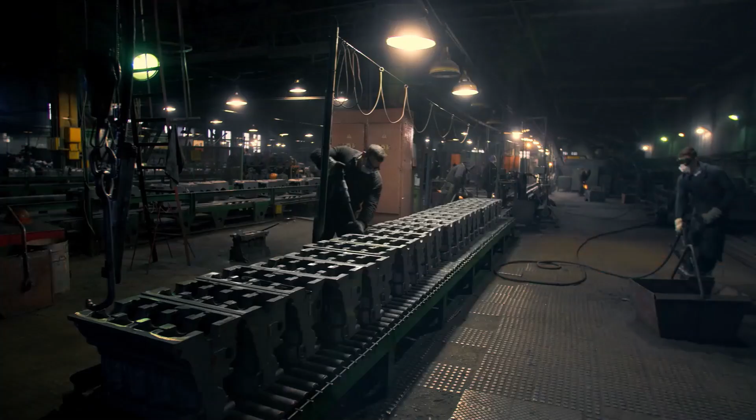The construction of Taipei 101 heralded a new era in steel manufacturing, as engineers sought to develop alloys that were not only robust enough to support the building's weight, but also flexible enough to withstand seismic forces. At the forefront of this endeavor was the Gaoyang plant, employing state-of-the-art techniques to produce steel components tailored to Taipei 101's unique requirements. The complex interplay of carbon, alloy, and refined iron yielded 5 distinct types of steel, each meticulously crafted to fulfill specific roles within the skyscraper's framework.

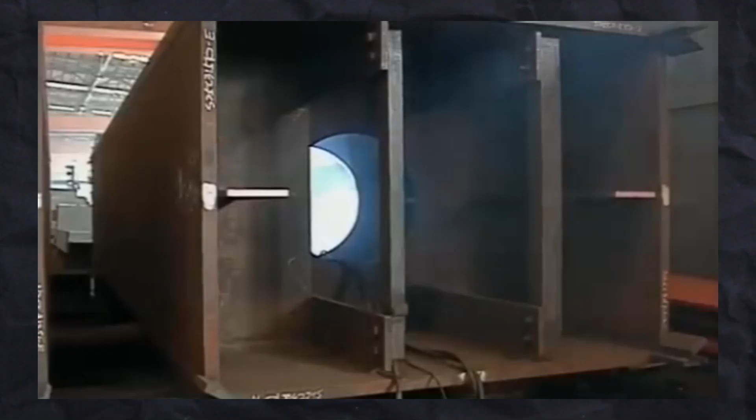The assembly of Taipei 101's super columns presented a monumental task, requiring the seamless integration of massive steel components weighing up to 90 tons each. Ordinary welding techniques proved inadequate for this endeavor, necessitating the adoption of advanced welding techniques to ensure the structural integrity of the building. Teams of skilled welders worked tirelessly, meticulously crafting each joint to perfection, a process spanning over years and underscoring the meticulous attention to detail that defined Taipei 101's construction.

At the heart of Taipei 101's resilience lies its unique structural design, engineered to flex and sway in response to seismic and wind forces. The building's core is anchored by 8 super columns, fortified with a blend of steel and concrete, while a massive tuned mass damper counteracts the effects of wind-induced oscillations. This groundbreaking approach to structural design pushed the boundaries of engineering, setting a new standard for skyscraper construction.

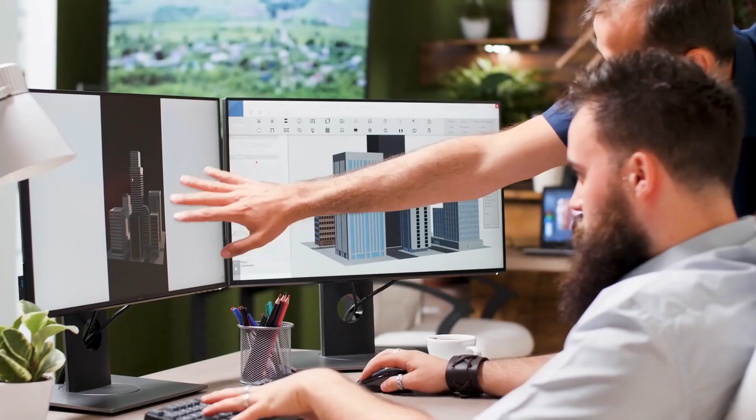Taipei 101's resilience isn't solely derived from its structural integrity, it's also rooted in its cultural symbolism and aesthetic significance. Drawing inspiration from traditional Chinese motifs, the building's design incorporates elements of strength, serenity, and prosperity. From the graceful curvature of its exterior to the symbolic use of bamboo and pagoda motifs, Taipei 101 stands as a testament to Taiwan's rich cultural heritage and enduring resilience.

Taipei 101 remains acutely aware of the ever-present threat posed by nature's wrath. Taiwan's seismic vulnerability, compounded by the onslaught of typhoons, poses an ongoing challenge to the building's longevity. Each year, the island nation faces the relentless fury of nature, testing Taipei 101's fortitude against the forces of earthquakes and wind. To confront these challenges, Taipei 101's designers turned to advanced simulation techniques and rigorous testing protocols.

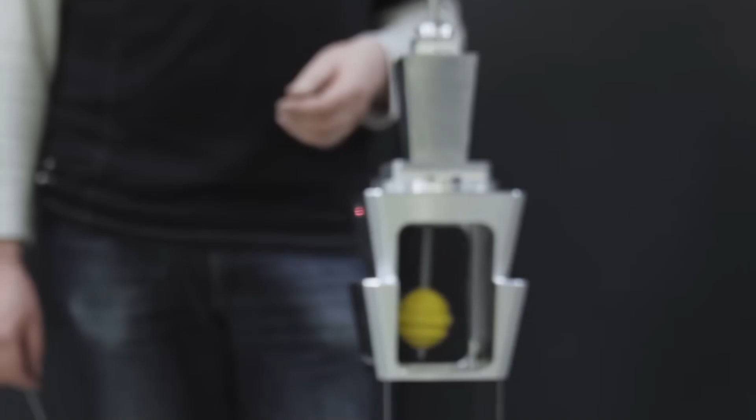From the precise placement of seismic isolators to the strategic use of aerodynamic features, every aspect of Taipei 101's design was meticulously crafted to withstand nature's onslaught.

Taipei 101 remains a testament to the human spirit, a towering monument to the resilience of the human spirit in the face of adversity. From its humble beginnings as a childhood dream to its realization as the world's tallest skyscraper, Taipei 101 embodies the indomitable spirit of Taiwan, a nation unyielding in its pursuit of progress and prosperity.

As Taipei 101 reaches ever skyward, it serves as a beacon of hope and inspiration, a symbol of Taiwan's unwavering dedication to defy the odds and reach new heights of greatness.

In a world fraught with uncertainty, Taipei 101 stands as a testament to the power of human ingenuity, reminding us that even in the face of nature's fiercest forces, the human spirit will always prevail. Crafted by brilliant engineers, this skyscraper embodies a fusion of meticulous planning.

The cornerstone of Taipei 101's structural stability lies in its innovative use of a passive damping system, specifically the tuned mass damper, ingeniously designed to counteract the building's sway induced by wind forces. As Taipei 101 sways in one direction, the massive tuned mass damper hanging from an upper floor swings in the opposite direction, effectively mitigating the buildup of energy and reducing the building's motion.

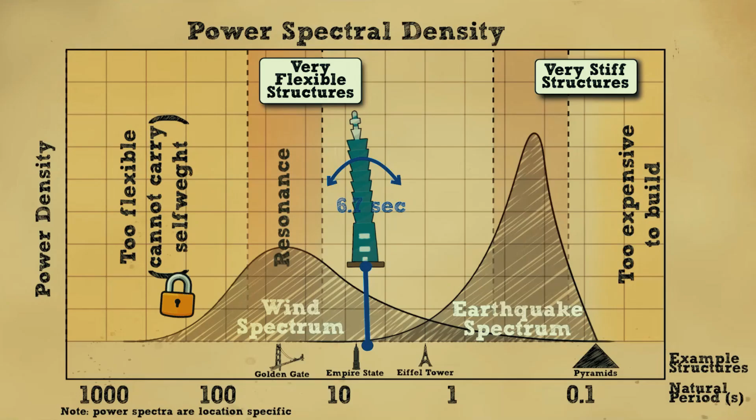This engineering feat not only ensures the structural integrity of Taipei 101, but also underscores its adaptability to withstand both typhoons and earthquakes. The realization of such ambitious designs necessitates more than just conceptual brilliance. It demands meticulous attention to foundational elements.

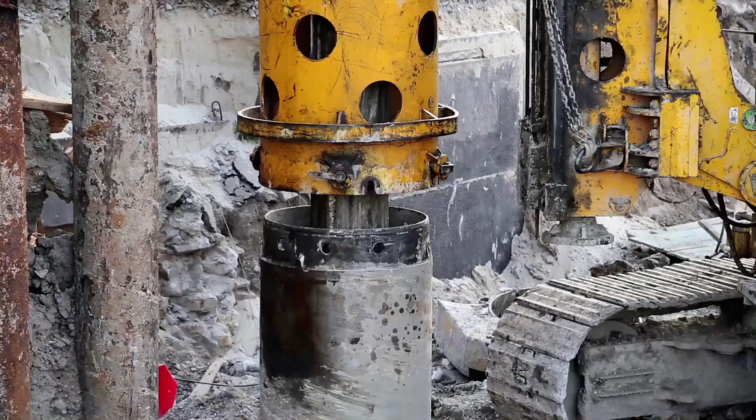In the case of Taipei 101, locating stable ground amidst the geological complexities of Taipei's basin posed a formidable challenge. Over centuries, changing sea levels deposited layers of soft, unstable silt and clay, requiring geotechnical engineers to delve deep, sometimes up to 196 feet, to reach solid bedrock. Extensive soil analysis and meticulous planning paved the way for the development of detailed foundation structures, a process spanning over months and involving the removal of staggering amounts of earth from the site.

The completion of Taipei 101 marked not just the culmination of a monumental construction project, but the beginning of a new chapter in its life cycle. As thousands flocked to its halls daily, transforming it into a bustling vertical metropolis, the skyscraper's operational intricacies came to the fore. From stringent security protocols to sophisticated energy management systems, every aspect of Taipei 101's operation was meticulously monitored and controlled, underscoring its status as a pinnacle of modern engineering.

Beyond its title as the world's tallest building, Taipei 101 embodies the spirit of innovation and resilience, serving as a beacon of hope for future generations and a symbol of Taiwan's unwavering spirit in the face of adversity.

With the unveiling of Saudi Arabia's 2030 vision, the country's rolling up its sleeves for some serious renovation. In 2011, flash floods destroyed 90% of roads and 27,000 buildings in Jeddah. Combined with Saudi's population quadrupling over the past 4 decades, there's a serious demand for housing all over the country, with officials estimating that 900 homes are needed a day to meet the demand.

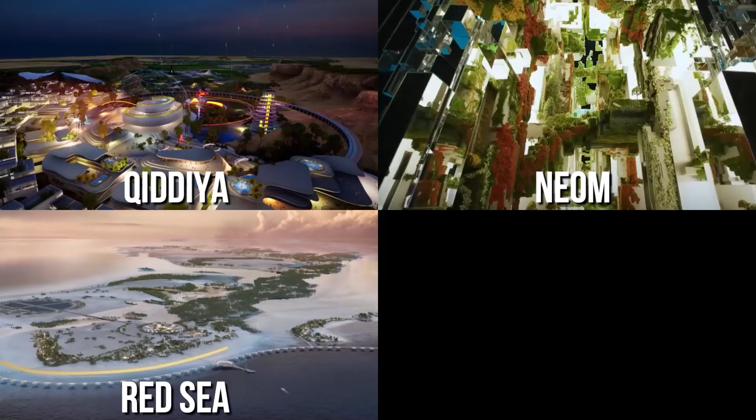But that's just a micro issue here. The Arabian Peninsula has largely made its income from oil, like its regional competitor UAE, which diversified its revenue from oil to other portfolios like tourism. It's time for Saudi Arabia to do the same. And it's doing just that, with larger-than-life projects like Qiddiya, Neom, Red Sea, Amaala, and much more. The country is aiming to be the business and tourist hub of the world.

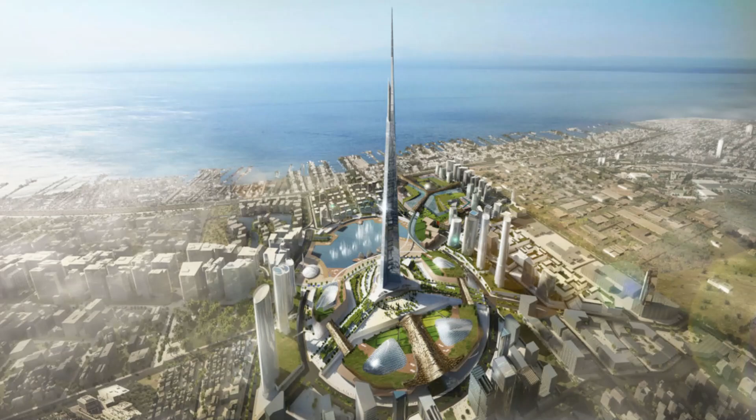To achieve this, Saudi Arabia will be spending a staggering $400 billion on infrastructure over the next few years. To symbolize this revolution and growth, it's building the tallest skyscraper in the world, the Jeddah Tower. This technically means that the Burj Khalifa will no longer be the tallest skyscraper, a position it has held for 14 years. The Jeddah Tower is widely reported to have a height of 1 kilometer, 180 meters more than Burj Khalifa. After 5 years of inactivity, construction on this mega project has resumed in September 2023.

So why was this project abandoned in the first place, and why is it being resumed now? What's changed? Let's get back to the topic.

Interestingly, the Jeddah Tower was originally supposed to be 1 mile high. However, when the soil of the proposed site was tested, there were doubts about whether it could support such a height. Consequently, the project was scaled down by 500 meters. Construction began in April 2013, and the piling work was completed by the end of that year.

The designer behind the Jeddah Tower is Adrian Smith, who also designed the Burj Khalifa and is now set to break his own record. He won the gig in 2010 during a competition between 8 leading architectural firms from around the world. Smith's portfolio boasts 4 of the tallest buildings in the world, including Trump Tower in Chicago, Jinmao Tower, and Pearl River Tower, both of which are in China.

Adrian's design for the Jeddah Tower is intended to look like a desert plant shooting upwards, symbolic of Saudi Arabia's growth. The company behind the Jeddah Tower, Kingdom Holding, is headed by the Saudi prince Al-Walid bin Talal, who owns 33% of the tower. In 2011, Kingdom Holding awarded a $1.23 billion contract to the local company, Bin Laden, as the main construction contractor.

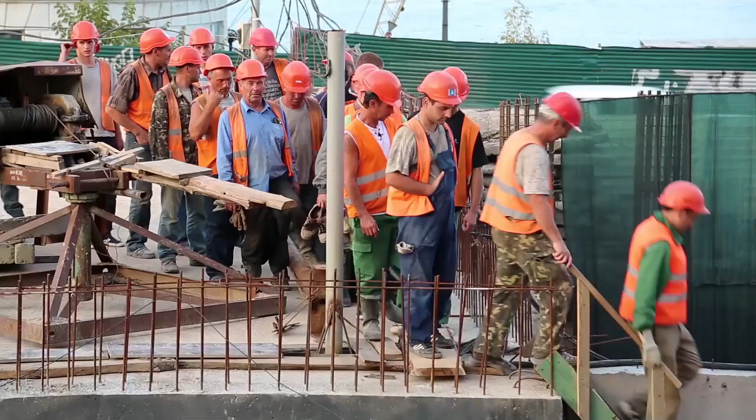This cost is surprisingly lower than that of Burj Khalifa, which cost around $1.5 billion. So how can a building that's taller than Burj Khalifa cost less? Labor costs in Saudi Arabia are cheaper, and construction costs have also declined after the global financial crisis of 2007-2008. Moreover, 3 shifts will work round the clock to expedite the process. With this speed, the tower was hoped to be open by 2020, but that wasn't the case.

Trouble started in 2017 when the owner of Kingdom Holding, Al-Walid, and the chairman of the Bin Laden Group were arrested. This was due to a massive crackdown initiated by the government that resulted in the widespread arrests of princes, ministers, and businessmen. Their arrest didn't completely stop the construction, and by the end of 2017, 60 floors of the tower were complete, with the overall height reaching 827 feet.

In 2018, structural work was officially halted due to labor issues with a contractor. It also didn't help that the COVID-19 pandemic started just a year afterward, leaving only a third of the tower complete. However, after a 5-year pause, the project's back on its feet, with major media outlets reporting the news.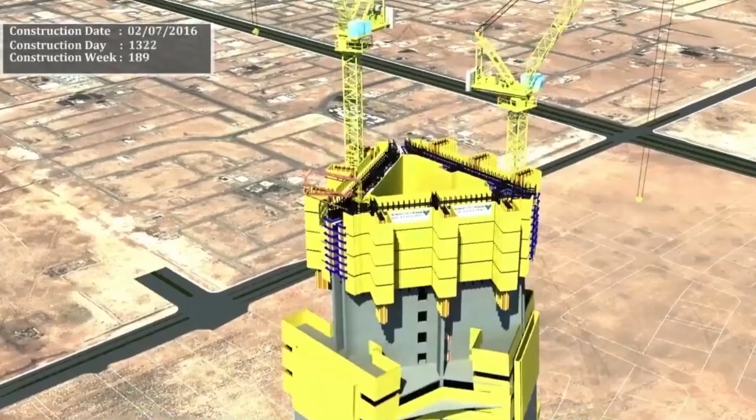Due to issues with the previous contractor, a new construction company is required to complete the 1-kilometer-tall tower. 14 construction teams from the Middle East, Europe, and China have been given 3 months to prepare their bids. So hopefully a contract will be selected by the end of the year.

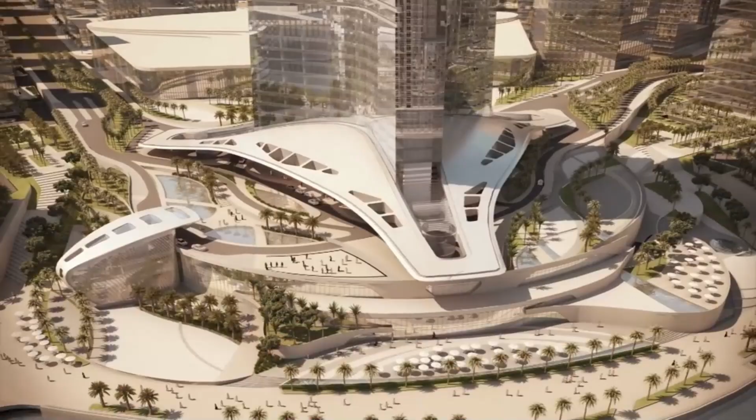Let's talk about the features of this ambitious project. The Jeddah Tower is literally and metaphorically the centerpiece of a much larger project, the Jeddah Economic City. The tower will occupy a 120-acre area along with surrounding buildings. Jeddah Tower, being a multi-use facility, will host a 4 Seasons hotel, rental apartments, office spaces, and luxury condominiums.

It's important to note that, like all skyscrapers, the very top of the tower is uninhabitable and is only there to increase its length. Hence, all floors above 167 are made of steel and only contribute to an empty spire. Given the tower's extreme height, it'll also have the highest observation deck in the world.

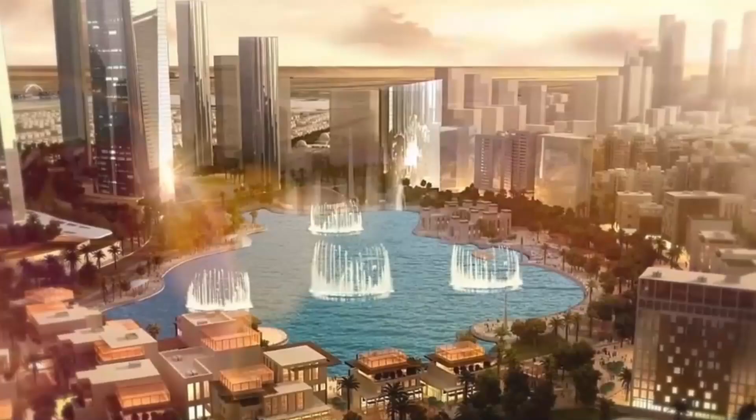The 57-acre area around the tower will feature public spaces, including shopping malls, residential units, restaurants, cafes, public parks, and much more. But that's not the best part yet. The city will also feature a man-made waterfront over 970,000 square feet, surrounded by pedestrian walkways, amphitheater, shops, and much more. One other reason for building a skyscraper, other than it being a tourist attraction, is that it greatly increases the value of the economic surroundings.

Talal Al-Maiman, a board member of the Jeddah Economic Company, said Jeddah Tower will be a landmark structure that'll greatly increase the value of hundreds of other properties around its Jeddah Economic City and throughout North Jeddah.

This concept is demonstrated with Burj Khalifa, where its surrounding malls and hotels made the most revenue, while Burj Khalifa made little or no profit. Although there's no official number stated, it's claimed that the Jeddah Tower will have 200 floors.

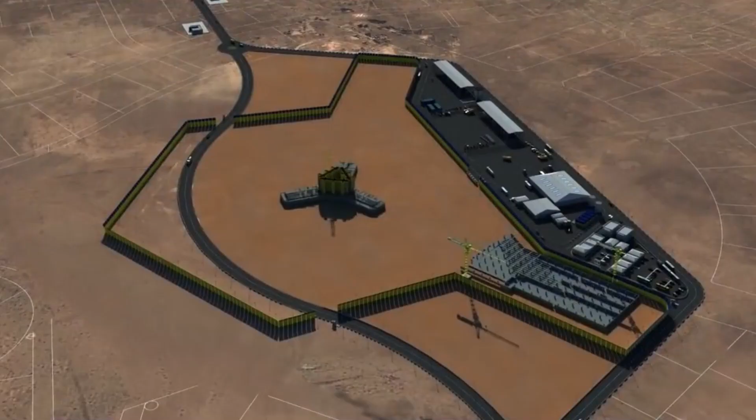But building the tallest skyscraper in the world isn't a piece of cake, and while you can draw what you want on paper, in reality, you can't ignore the laws of physics. So, for a tower like Jeddah aiming to be the highest in the world, the primary focus for the engineers is stability. Computer modeling programs indicated that the most stable foundation would be triangular-shaped.

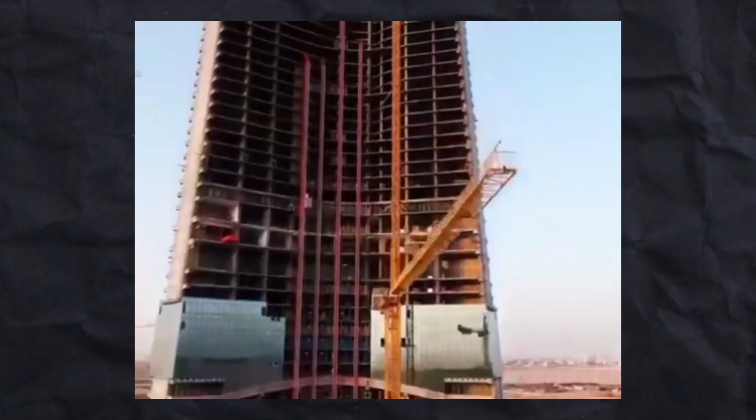This gives the tower a Y-shaped structure, while its exterior would be made entirely of glass. The foundation is around 15 feet, and the weight of the building is expected to be 900,000 tons. As the bedrock of the proposed location was soft, a metal framework would be used to support the building. 18 million cubic feet of concrete and 80,000 tons of steel would be used to install piles 660 feet deep.

The next problem is the wind pressure. To solve this, the facade structure is made smooth and sloped. This form gives better aerodynamic performance than the step design found in Burj Khalifa. The wind pressure gets stronger as you go up. High-strength concrete would be used to construct the core to prevent the tower from swaying on windy days. Mobility in a tall skyscraper is another critical aspect of the design.

For this purpose, the Jeddah Tower will use 12 escalators and 59 elevators, 5 of them double-decked. These custom elevators run at a top speed of 22 miles an hour to transport passengers quickly across the building's many floors. They can't run faster, as the rapid change in air pressure would cause nausea to passengers.

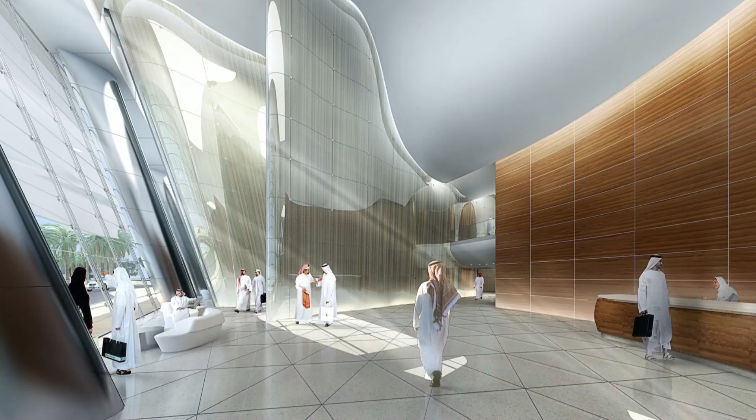Moreover, no elevator would go from the ground to the top floor, so people living on the top floors would have to exchange their elevator on an intermediate floor known as the sky lobby. There will be a total of 3 sky lobbies so that no elevator gets overburdened.

The Jeddah Tower also offers residential space for those willing to immerse themselves in a lavish experience. There would be 500 well-planned units divided into 4 tiers. Tier 1 and 2 apartments have lesser facilities relative to Tier 3 and 4, which are located at higher floors, offering a spectacular view of the city. Residents of the 4th tier will have access to a private entrance as well.

But that's not all. As Saudi Arabia is targeting entrepreneurs, investors, and tourists from all over the world, the Jeddah Tower will serve as their mainstay. With plans for expanding the new King Abdulaziz International Airport for a whopping $31 billion, the airport would have a capacity of 114 million passengers annually. This will turn Jeddah into the business and commercial hub it's always wanted to be.

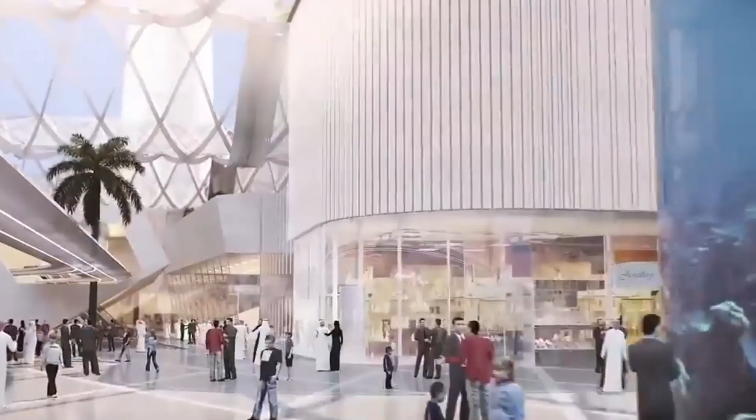To accommodate the influx of foreign travelers, the Jeddah Tower is partnered with a Four Seasons hotel. The hotel consists of 200 rooms and 121 luxury apartments, along with executive meeting rooms, shopping stores, halls for hosting events, and top-notch restaurants. Regarding the completion, there's no official date mentioned on their website, so one can expect the project to be operational by the end of this decade.

While this is great news for many, critics believe that the obsession with competing for the tallest skyscrapers should end, especially as the towers mostly cater toward the Arab elite and rich foreigners. Opponents believe that this money should rather be spent on education and research, as the Arab countries are suffering from poor education levels.

With Dubai at risk of losing the title of the tallest skyscraper in a matter of a few years, they're adding another tower to their list, Dubai Creek Tower. While the tower won't be taller than the Jeddah Tower or even Burj Khalifa, it does show the UAE's desperation to stay on top of the game.

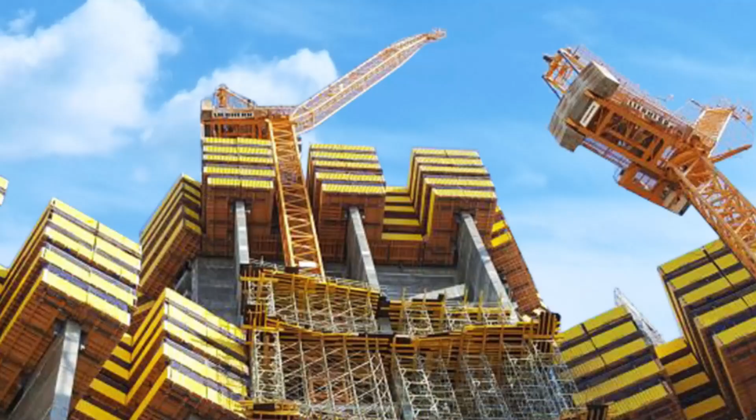Will the Jeddah Tower be a full stop for the skyscraper industry? Of course not. It's possible that a new country is already planning to build the next tallest structure, just like Saudi Arabia did. But the question is, how tall can we build?

Experts believe that a 6,500-foot structure, almost twice the height of the Jeddah Tower, is possible, but won't be practical. It's because after a certain height, a skyscraper is no longer habitable and only hosts support machinery. However, even if a 6,500-footer was practically and economically feasible, very few countries would dare to step into this venture given the astronomical resources required to build such a giant.

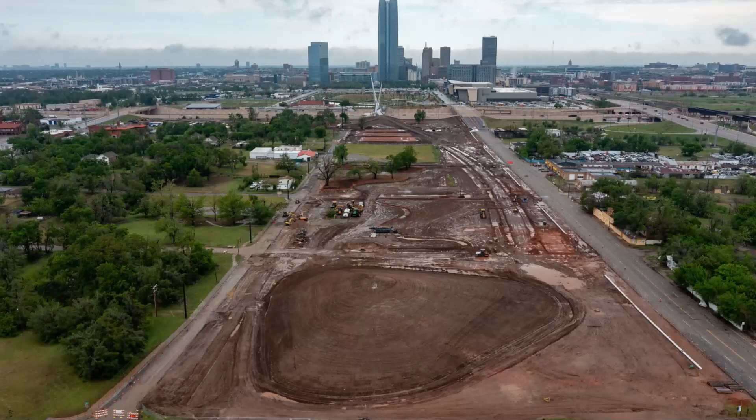The tallest building in the US is coming, and it's expected to reach a staggering height. A new skyscraper is set to take the title of the tallest building in the US, and it's not the usual suspects like NYC, Chicago, or LA. Instead, this record-breaking tower will rise in Oklahoma City, right in the heartland of America.

Named the Boardwalk at Bricktown, the tower, designed by Office AO and developed by Matteson Capital, will stand at an astonishing 1,907 feet. This height surpasses the current tallest building, One World Trade Center in New York City, by about 200 feet. In January, the Oklahoma City Council approved a modification request from the developers to increase the tower's height from the initially approved 1,750 feet to 1,907 feet. This approval not only makes it the tallest building in the U.S., but also the 6th tallest in the world.

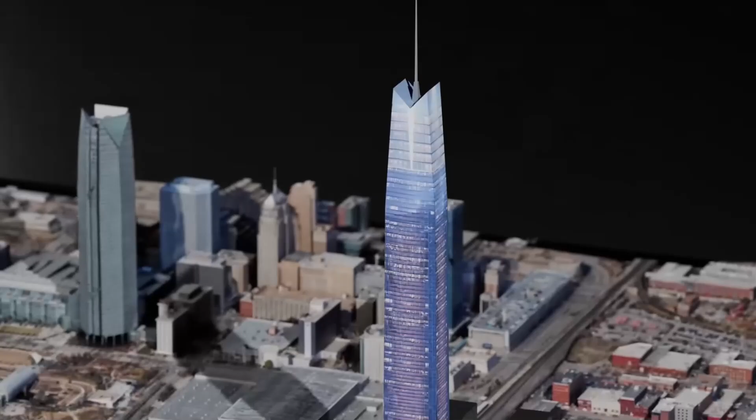The base will have open plazas and space for retail and dining. Above that, 4 towers will rise. 3 will be 345 feet tall, while the 4th, Legends Tower, reaches 1,907 feet. This height honors the year Oklahoma became the 46th state, in 1907.

The building will include a hotel, 1,776 residential units, and 110,000 square feet for dining, retail, and entertainment. If built as planned, it'll be the 18th building to become the tallest in the U.S. It'll be the first in Oklahoma and one of the few outside New York City.

Before One World Trade Center held the record, the Willis, formerly Sears Tower in Chicago, was the tallest. How does it compare to other skyscrapers in the U.S.? Well, if all goes well, this new skyscraper will dethrone One World Trade Center in New York.

In the heart of Lower Manhattan, the One World Trade Center, also known as the Freedom Tower, stands tall as a symbol of resilience, solidarity, and hope. It reaches a height of 1,776 feet, honoring the year the Declaration of Independence was signed. Finished in 2014, it stands on the site of the original World Trade Center, which was tragically destroyed in the September 11, 2001 terrorist attacks.

Designed by David Childs of Skidmore, Owings & Merrill, One World Trade Center is a masterpiece of both architecture and symbolism. Its modern glass exterior, topped by a spire, is a testament to the American spirit. Besides its symbolic value, it offers amazing views of the Manhattan skyline, cutting-edge office space, and top-notch amenities.

Its observatory, located on the 100th, 101st, and 102nd floors, provides visitors with stunning views over New York City, serving as a poignant reminder of the city's enduring strength and vitality.

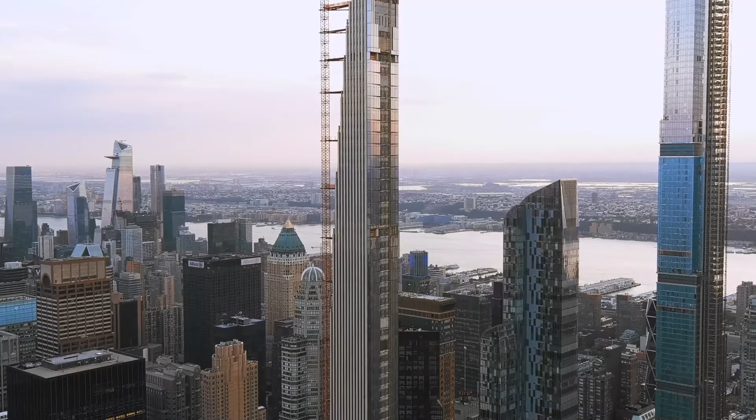Its slender design features state-of-the-art engineering and technology, paying homage to New York's pre-war towers. The tower's terracotta and bronze facade radiates a timeless beauty, reflecting the sky's changing colors.

Inside, luxurious living areas offer expansive views of Central Park and the Manhattan skyline. Residents enjoy a range of facilities, including a private fitness center, pool, lounge spaces, and concierge services, ensuring unmatched luxury and convenience.

Another towering masterpiece in New York is One Vanderbilt, next to Grand Central Terminal in Midtown Manhattan. Rising to 1,401 feet, this skyscraper is a bold example of contemporary architecture and sustainable development. Built by Kohn Pedersen Fox Associates, One Vanderbilt features a sleek glass facade and a unique crown, making a dramatic statement while blending with its surrounding cityscape.

The tower's eco-friendly features and state-of-the-art design have earned it a LEED Platinum certification, showcasing its dedication to sustainability. Inside, One Vanderbilt offers Class A office space, retail stores, and restaurants, making it a hub of activity and a magnet for business, travel, and cultural discovery.

The upper-floor Skyline Observatory provides visitors with breathtaking views of the city, offering a unique perspective on New York's landmarks and bustling streets. Rising above the Manhattan skyline, 432 Park Avenue is a stunning work of architectural art with streamlined and elegant style.

This residential tower redefines luxury living in the heart of New York City, soaring to an impressive height of 1,396 feet. Designed by Rafael Viñoly Architects, 432 Park Avenue stands out with its square footprint and tall vertical lines, giving it a minimalistic look.

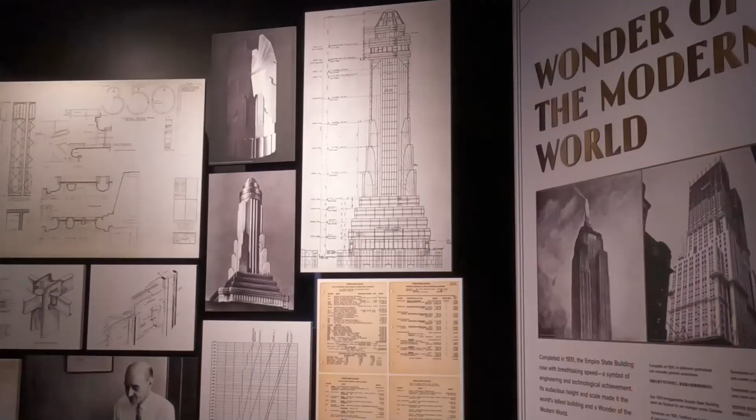Throughout its illustrious history, the Empire State Building has stood as a testament to the resilience, fortitude, and unwavering spirit of New York City, remaining a source of wonder and appreciation for its lasting heritage as a center of ambition, culture, and innovation.

Finally, the Bank of America Tower in Midtown Manhattan is a magnificent example of environmentally friendly building practices and corporate social responsibility. Standing at 1,200 feet, it's one of the city's tallest structures, completed in 2009.

Designed by Cook Fox Architects in association with Adamson Associates, the tower features a sleek contemporary design that incorporates cutting-edge sustainable technology. Its glass curtain wall facade optimizes natural light while minimizing energy use, earning it LEED Platinum certification, the highest standard for environmental performance.

Inside, the Bank of America Tower offers modern retail stores, office spaces, and facilities aimed at boosting tenant productivity and well-being. Every aspect of the building, from its rainwater collection and recycling facilities to its high-efficiency HVAC systems, is designed to reduce environmental impact.

The tower's operations and activities also reflect a commitment to sustainability and community involvement, supporting local charities and promoting diversity and well-being amongst its staff. The Bank of America Tower stands as a living example of social and environmental responsibility in the heart of New York City.